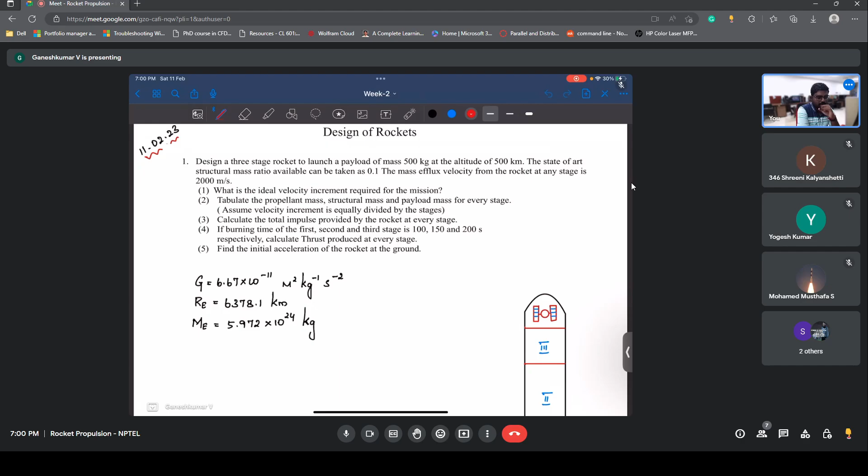I hope I'm audible. Can someone confirm it? Yes, sir. Okay, thank you, Digant.

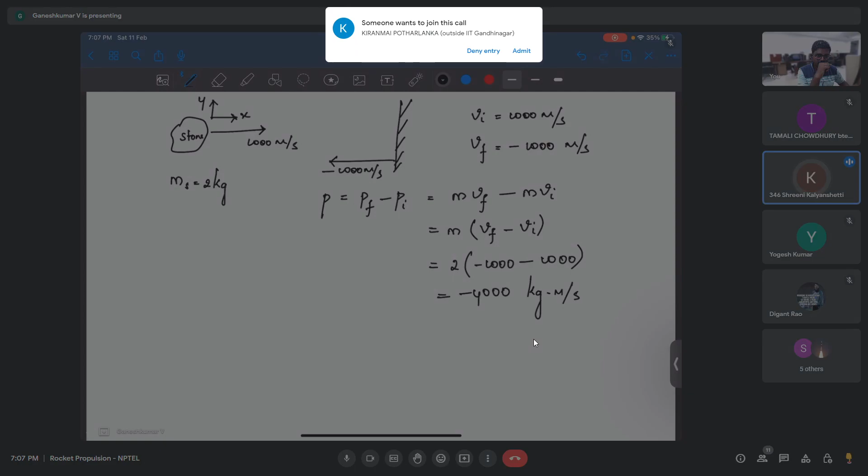Sir, I had a question. Due to my college exams, I couldn't complete assignment one and two. Will it affect the program as such? It depends, if you are appearing for the exam, you are supposed to get certain marks to be considered a pass, so in that way it affects you, but not that much. So how much do you need to get a pass mark?

So, there's some certification criteria, right? Based on that only, you will be graded. If you leave one or two assignments, I don't think it means you won't be able to attend the exam or get the certificate. It just means it affects your grade, that's all. Other than that, nothing's going to happen.

I'll complete it in this week, just wanted to confirm. No problem, it's just your grade might get affected. If there are 12 assignments and you're able to complete 10 fully, I think it will be some 80%. And if you're able to get good marks in exam, you can easily cross 80%, or maybe 70%.

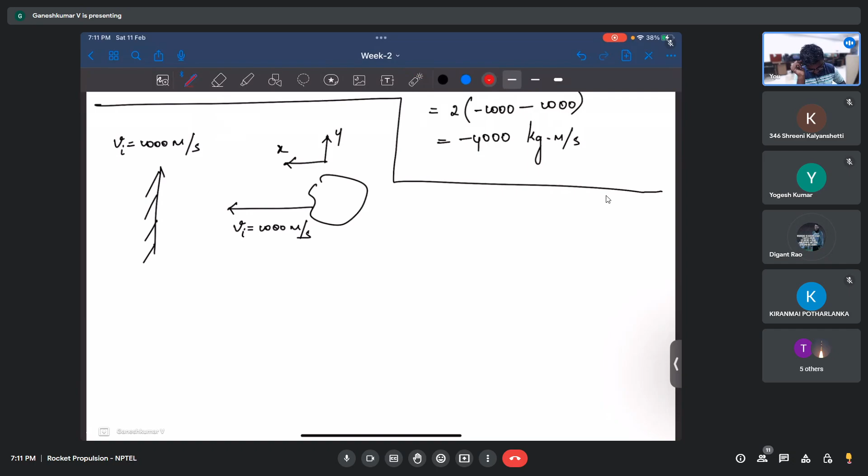If you solve for this, it is again going to be m into vf minus vi, which is 2 into minus 1000 minus 1000, again giving minus 4000. It doesn't matter which frame of reference you take, it's based on what is your initial velocity of the stone. If the initial velocity is positive and the final velocity is negative, you should always find momentum from final minus initial. Whenever you do it, for whichever frame of reference you take, your change in momentum is going to be negative.

Okay sir, thank you sir. Is that clear? Yes, sir. Okay.

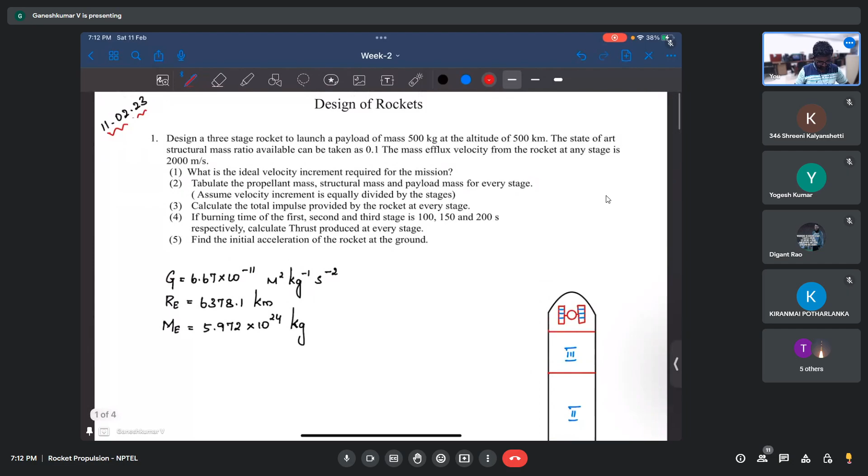One second, I think I got disconnected.

If we have no more questions, I will start with today's question. Today we are going to solve only one problem, not so many problems. But with this one problem, you should be able to solve all your week 3 assignment problems. This is also going to be interesting, I'm going to show a nice fact after you perform this exercise. I named it design of rockets, just to cover it, just for fun.

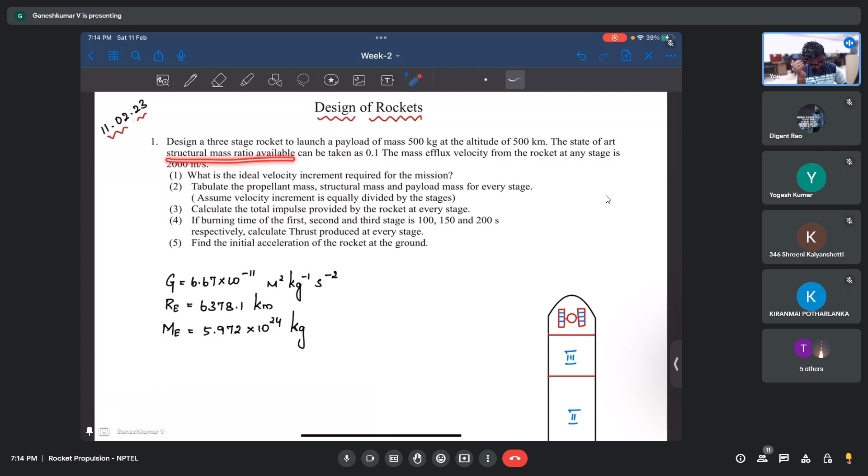What we will do today is solve this one problem: we will try to design a three-stage rocket motor, a three-stage rocket. Using this three-stage rocket, we will launch a payload, which can be anything like a satellite, of mass 500 kg at an altitude of 500 kilometers. So we need to launch a satellite of 500 kg and station it at 500 kilometer altitude above Earth's surface. The state-of-the-art structural mass ratio available can be taken as 0.1. What is structural mass ratio? Can anyone guess?

It's fine. You can give any answer.

There is something called structural mass ratio. Structural mass ratio can be defined as structural mass divided by total mass of the rocket. So what is the convention we follow for that? Is it alpha or beta? I think it's just beta, sir.

Okay, is this fine? Can I write like this? We can take ms to be mass of structure and m-naught to be initial mass of the rocket or at stage. Okay, yes. So this we are going to take as point one.

So this is something that comes from design perspective. This is something we can't have control over as a propulsion engineer, it's an aspect of the structural engineer, how well he can design a rocket with a very less structural mass ratio. Do we need less structural mass ratio or more? What do you think?

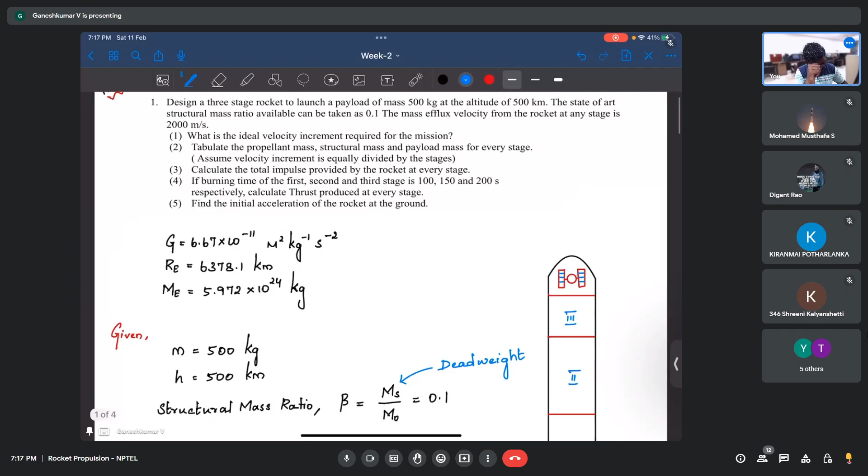So as a design engineer, what people will try to do is reduce this dead weight as low as possible in a rocket, because if the total mass is 100 tons and the structural weight is 10 tons, if you can reduce the 10 tons to 5 tons, then you can raise that 5 tons as payload mass instead. So with the same rocket, you can send a higher payload. That is the reason they will try to reduce it, or it comes from the design aspect.

For now, let's take a state-of-art structural mass ratio to be 0.1 - that's what it presently is. In fact, for a solid propellant rocket motor, it's going to be around 0.08, and for a liquid propellant rocket motor around 0.05. Some very well designed rocket motors even get to 0.03. So there are different ways, it directly comes from the design aspect.

So let's not worry more about this, we'll just assume it to be 0.1 for every stage - if we have three stages, it's going to be 0.1 for every stage. And then what else we have is the mass efflux velocity from the rocket at any stage is given to be 2000 meters per second, which is nothing but velocity of jet.

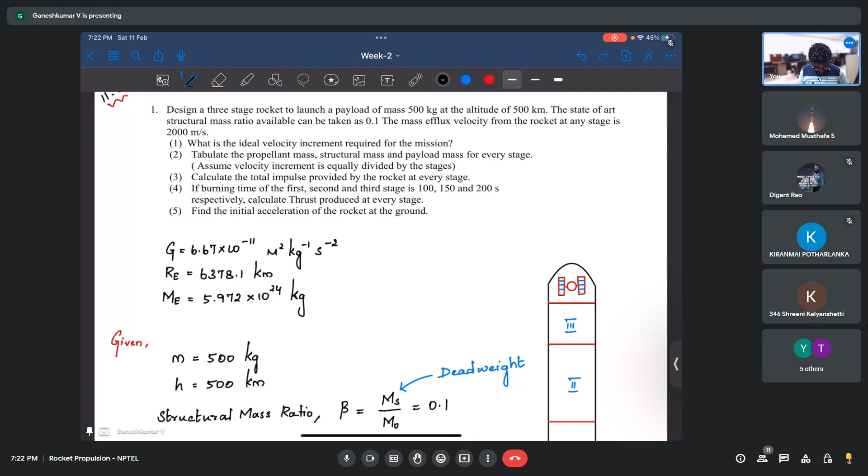Is this clear till now, what I am trying to convey? Yes sir. So how do we calculate delta V? Or let's say, what is the total velocity increment you need? How do I calculate it?

So you understand the fact that we need velocity increment, right? Because the satellite, at ground, has zero velocity. So if I want to put it in the orbit, it cannot be at rest in the orbit, right? It should have some velocity so that it goes round and round in the orbit. What should be the velocity? That is what we need to find out.

So do you know any formulas that we derived previously to find this out? Maybe the concepts behind deriving those formulas.

So Vj multiplication of ln of mi divided by mf. Okay, the delta V is equal to Vj ln of mi by mf, right? Yes sir.

Okay, but this is the delta V given by the rocket. I'm not asking about that delta V. I don't know the mi, I don't know the mf - I didn't give anything about the rocket. Mi yes, and mf you are going to find out, right? How is this going to help you in finding the delta V?

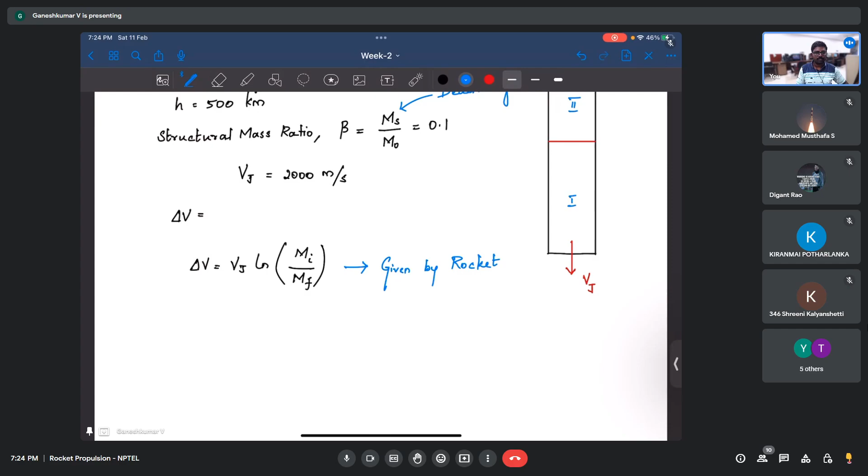So if I know the rocket, I can find the delta V given by that rocket. But I'm going to design the rocket - for that, I need to know what is the delta V required, so that I will design a rocket such that it gives me that delta V. So basically, I'm telling that I want to put this mass at 500 kilometer altitude. What should be my delta V?

So let me write it down - maybe you can recall it. Delta V is actually G times ME by RE times, RE plus 2h divided by re plus h. Can you guys remember this formula?

So you may be referring to it as VT, is it? Yes sir, VT. So total velocity, what does VT mean? The total velocity increment, right? Yes sir, VT.

So what this actually tells us is, where this concept comes from, is this required for the mission. There are two things: this is required for the mission in order to put a payload on the orbit. So what is the delta V I need for that payload? That is what this formula tells us. And as soon as you know the total velocity increment you need, you can design your rocket such that it gives you that increment to the payload.

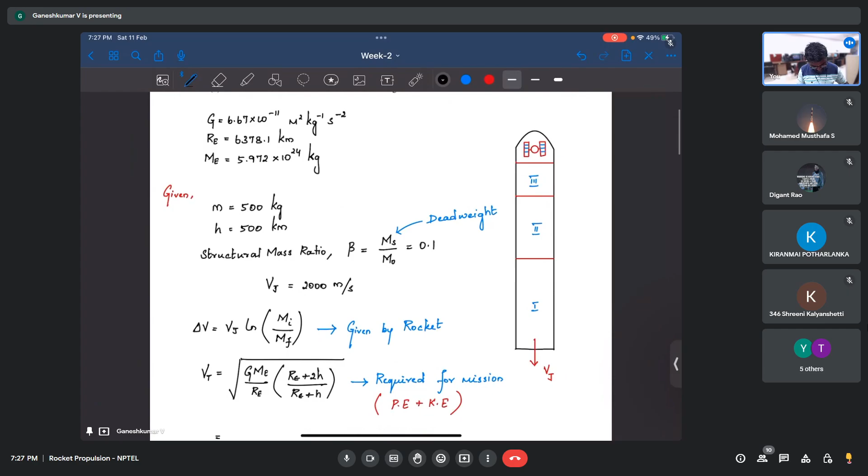So do you have any doubts? What is the implication of these two formulas? Both tell us about delta V. So here VT is nothing but total velocity increment, which is also a delta V.

Is this fine? Yes sir, did I confuse? It's fine, right?

So if this is fine, maybe you can substitute the values, and you can let me know what is the delta V required for this mission. So I just want to connect whatever you learned in the previous week to this week, how these two equations are related to each other. That's why I made this small exercise before starting the calculations of staging in rockets.

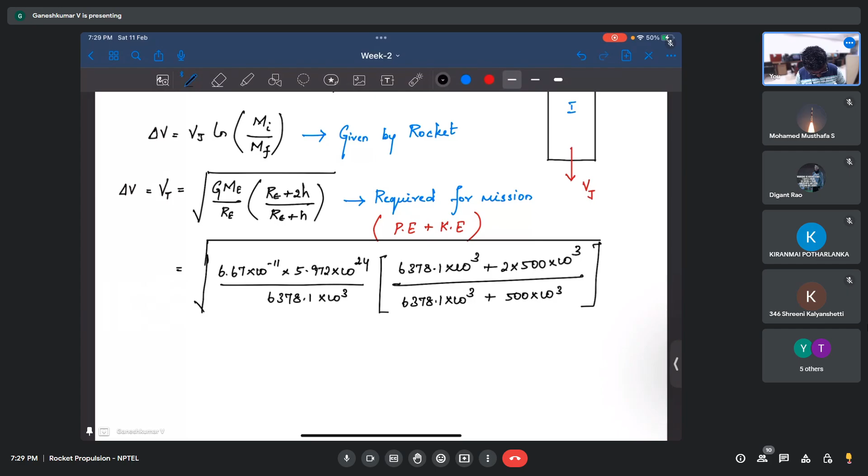So it should be placed at 500 kilometers, right? Then what should be the total velocity increment I need? Could anyone please tell? Are you guys calculating or?

I hope you can understand. So we have 10 people here, including...

Sir, 8.18 kilometers per second. I think so. So it is 8.18 kilometers per second. All right. So in order to put a satellite of 500 kg at an orbit of 500 kilometer altitude, you need a delta V increment of 8.18 kilometers per second.

Now this delta V increment should be given by the rocket, and that rocket should be able to produce enough thrust to give me this delta V increment. So in order to have this much thrust, we are going to divide this rocket into three stages, and we are going to perform calculations to determine what is the mass of these stages, how much mass of propellant you need to achieve this delta V. That's what we're going to see going forward.

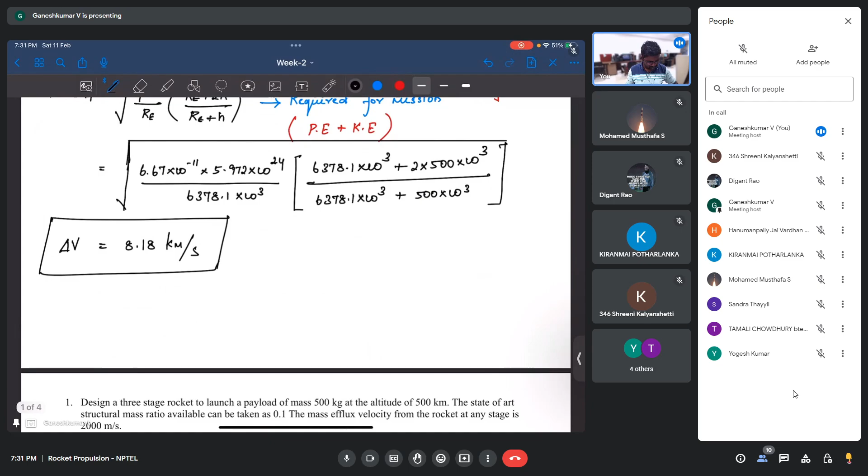So the next question is, if anyone has any more doubts, please ask me now. You can stop me anytime and ask me, okay. So what we know till now is delta V to be 8.18 kilometers per second. So this is done.

Now what we need to do is we were asked to tabulate propellant mass, structural mass and payload mass for every stage. And what I know is mass of payload is 500 kg, which is at the top of the third stage, right? It is not at the first stage. And what else I know is that beta is 0.1, which is for all the stages.

Let's say beta 1 is also 0.1, beta 2 is also 0.1, and beta 3 is also 0.1, okay, which is nothing but mass of structure by mass of stage i, whichever stage it is. i varies from 1 onwards.

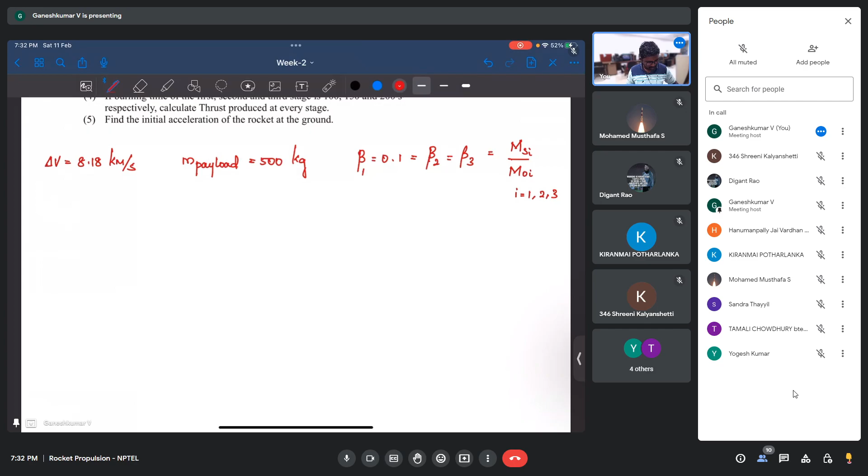Now how do we go forward? We start our calculations. Can anyone give me a hint or something? And we also have Vj to be 2000 meters per second.

So in order to do this, we need to use this equation, right? Mi by Mf. Okay, what we know is we know delta V, we know Vj, but we don't know Mi and Mf, right? And one more thing is this is for a single stage, right? So what about multi stages?

We have three stages, right? For multi-stage rockets, how do you perform this calculation? So we need to add each and every stage of delta V, sir. Wonderful. So the total delta V total is going to be delta V1 plus delta V2 plus delta V3.

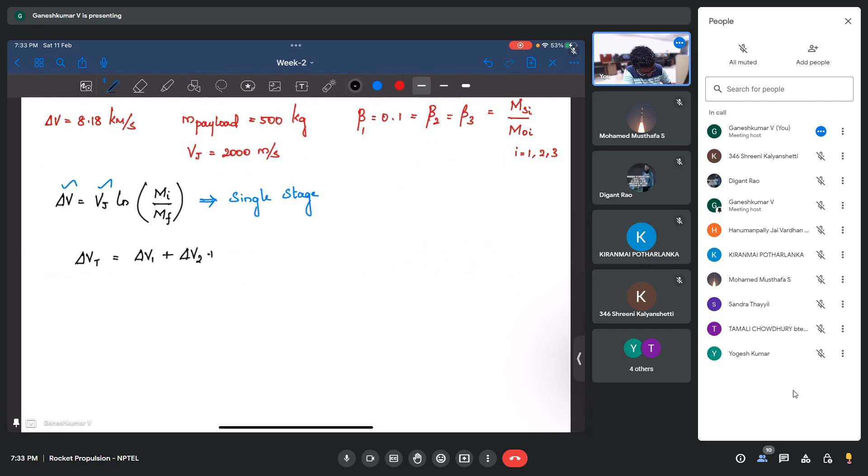So for each and every stage we are going to have Vj, and we are going to assume Vj to be constant, which means the propellant is going to be same, and we are going to assume Vj to be constant. If you do that, what happens?

First stage ln of mi by mf, second stage mi by mf, third stage mi by mf, right? But still, yeah, this is fine. Delta Vt, this is going to be for three stage rocket.

Okay, so we are asked to assume velocity increment is equally divided by the stage, which means that... we'll come to that later, no problem.

Now here, this total velocity increment we know, Vj we know, right? But still this equation doesn't help us. We don't know Mi and Mf, right, of each and every stage. How do we go forward with this? Can anyone guess what could be the way to find all the masses?

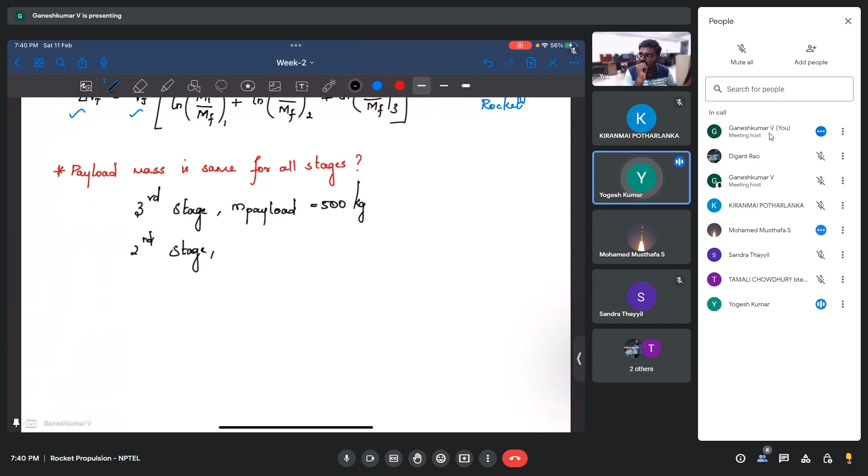It will be 500 only, sir, because it is not going to change its weight. Only after the first stage has burnt, it will be released into the orbit. So the total weight of the rocket is going to be less, but the payload weight is not going to be less, because it is going to be ejected into the orbit in the last stage only. Still, in the last stage, the payload has the same weight. So you need to note that payload mass is 500 kg - that is true, but the final mass of each and every stage is going to be different.

Right, so okay, I agree with you - payload mass is going to be the same. Let me put it in this way: payload mass in the sense is just the payload. Okay, so let me ask another question.

What is my MF at all at each and every stage?

So we can do one thing. MF of first stage will be MF. Then second stage is MF. We can take the total mass, final mass, as MF. Then for second stage we take MF minus M1, which is the mass of the first stage. Then for third stage we take MF minus M1 minus M2, which is the mass of first stage and second stage.

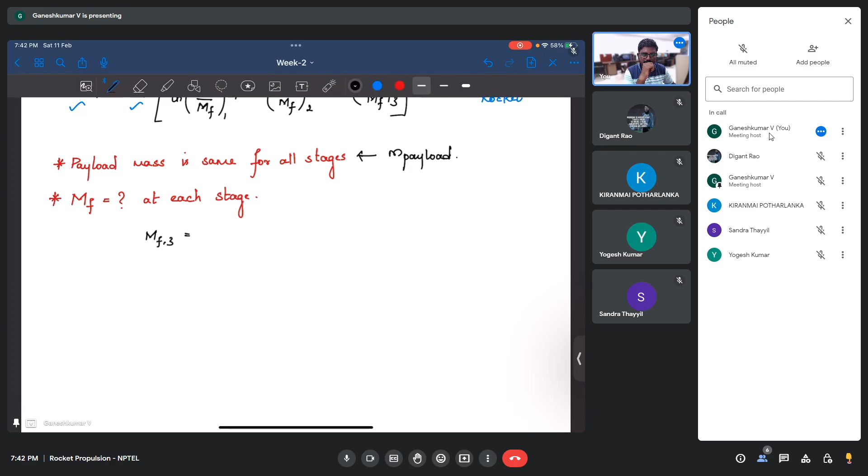So total mass of the rocket, that is Mi, minus initial mass of the rocket, Mi minus MF2, minus MF1, minus m of...

This is also right, but you are thinking in a very complicated way. It's so simple. At the third stage, what I'm going to have is the propellant is going to be depleted, and I'm going to get separated from the third stage, and what else is remaining is just payload, right?

It's just 500 kg, right? Yes sir. Okay, so whatever you said is also right, but it is a little bit different.

So let's say what is Mi? Mi is going to be m of 1 plus m of 2 plus m of payload, right? And then we have minus m of 2 and minus m of 1. Whatever you said is right. These are all going to get cancelled, and finally m of payload is going to be there, right?

So whatever you said is also right, but you can think in very simpler terms also. The third stage final mass is going to be 500 kgs.

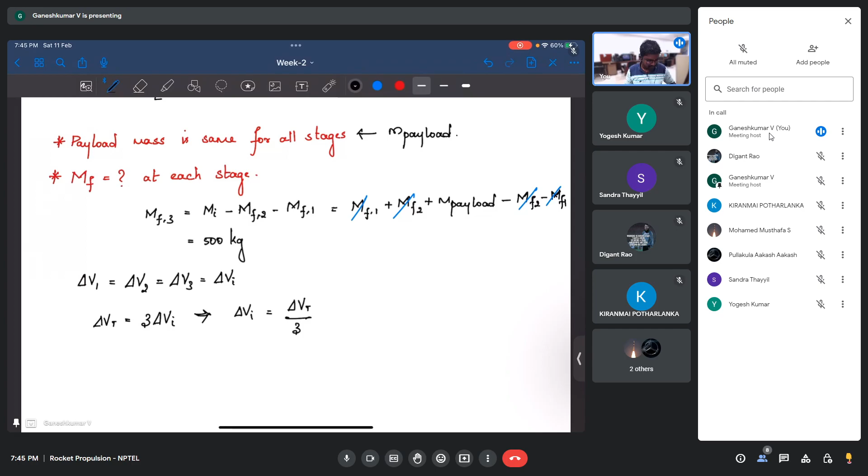Then what happens to the equation? Delta Vt is going to be 3 times delta V, right? So each stage is going to give me the same delta V. That is what this statement is telling us. So what we can get is, we know that delta V of any stage, let's say I, it's nothing but delta Vt divided by 3, because we have 3 stages, okay.

So why do we need to know this? Because what we know is delta V of, let's say, third stage, it's nothing but Vj ln of Mi of third stage divided by Mf of third stage, right? Here we know Mf of third stage, we know Vj, and if we know delta V3, we can find the initial mass of third stage, right? And then one by one we can go forward for the subsequent stages. That is the reason we start from where we know, okay.

So can anyone tell what is delta Vi, which is nothing but 8.18 divided by 3, right? How much is that? 2.72, sir. Okay, 2.72 kilometers per second, right? Yes sir. Okay, very good.

So then can anyone tell me what is Mi3, which is nothing but exponential of delta V3 by Vj, times mf3, which is nothing but payload. So how much is this Mi3, initial mass of the third stage? Can someone quickly calculate?

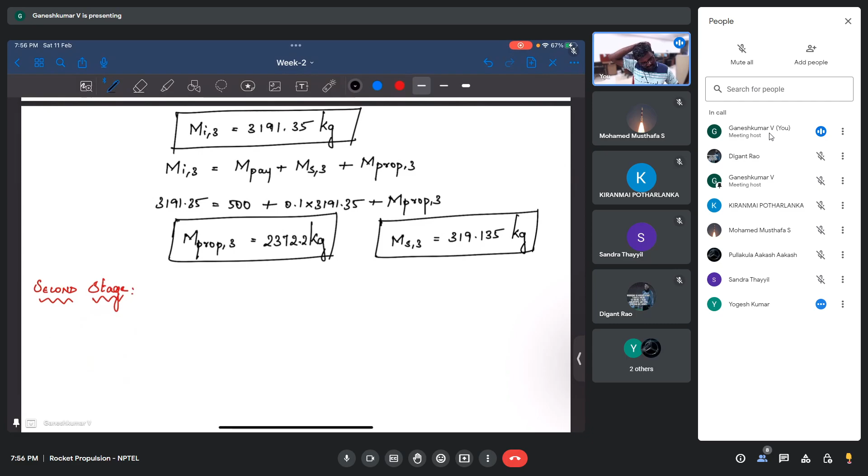And what we also know is mi at 3, which is also 3191 kgs. And let's, for the sake of completion, we will write ms at 3 also, which is going to be 319.135. So these are the values. Sir, can you show me the calculations of MF3 one time?

So is this one? Yes, sir. So you understood, or can you repeat it one time? Yeah. So at the end of final stage, all the propellant is burnt out, right? But structure remains there. Structure and the payload are going to be there at the third stage. What we know is, in that final mass, we know only payload.

Since we know payload in that final mass, we start our calculation from there. For other stages, we don't know anything about structure or payload, or the initial mass. So that's why we start from here, and we know that at the end of final stage, if you look at this rocket, we have this satellite which is 500 kg, and we also have this structure around it, which is also zero point 0.1 times initial mass of 3.

So this whole thing, okay, this is payload, and this is the third stage, and at the end of third stage, the propellant here will get depleted, but this structure is going to be there with the payload, which is satellite. So this is going to be 500 kgs, and this is going to be zero point 0.1 times r, nothing but beta times mi of 3. So that's why we wrote the final is going to be 500 kg plus structure, which is ms of 3, which is nothing but beta times mi of 3. Is that clear, Yogesh?

Yes, sir, now it's clear. So there's going to be structure also at the end of every stage, so that's what you need to take into account. That's the takeaway here.

So now, coming to the second stage, again what we need to know is mf at second stage and mi at second stage, right? Then maybe if we write, let's say delta v2 is going to be vj times ln of mi of 2 divided by m of 2. The equation can give us mi of 2, but what we need to know for this is m of 2. So what should be the m of 2?

So at the end of, again let's think logically, at the end of second stage, what is left after all the propellant is gone? What is left? At the end of second stage, this whole propellant is gone, right? We have this full third stage is going to be there, and we are going to have this satellite, which is payload. But you should understand, for the second stage, this whole thing is a payload, because third stage is not ignited. It just stays there as a mass, and in addition we have a satellite.

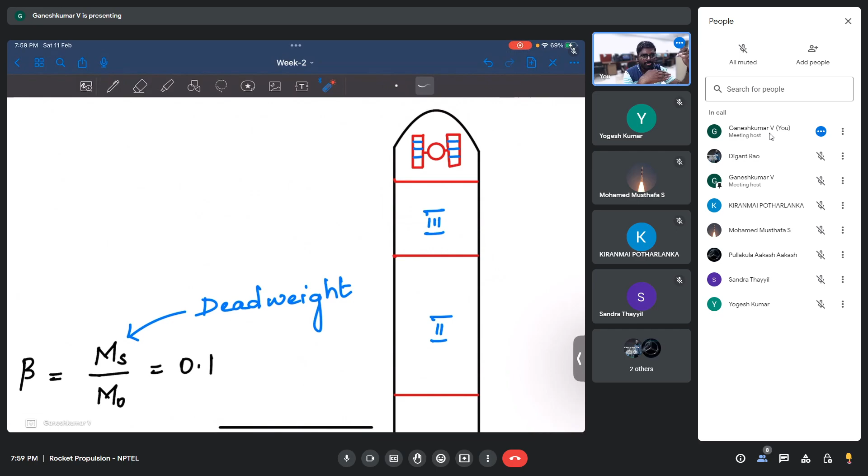So these both are considered to be one single payload for the second stage. So for the second stage, third stage and satellite is called as payload. So if that is the case, what we are going to have here is mass of satellite plus mass of third stage, but we can write these two together as mass of third stage, or maybe mi of 3.

And in addition, what we'll have, we will have structure of second stage. Is this right? Do you guys agree? Yes, sir, right, yes sir. Okay, so for the third stage, third stage is just being idle till the second stage has been completed. So that's why it is also considered as a mass, as a payload, or a useful mass for the second stage. And we also have a dead weight or structural mass at the second stage, at the end of everything.

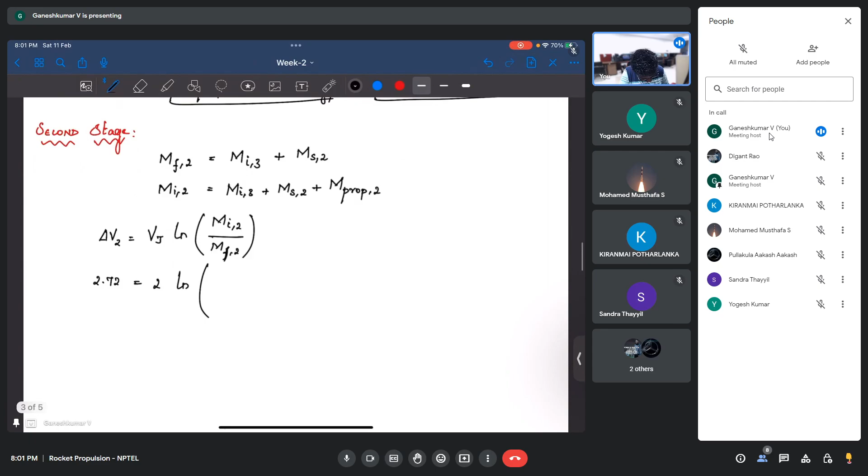Now this would be mi of 3 plus ms of 2 plus mass of propellant at second stage, right? This would be mi of 2. But anyway, we will calculate mi from here. So what would be delta v? Again, we have 2.72 and then ln of mi of 2, which we will keep it like this, divided by m of 2, which is nothing but mi of 3 plus ms of 2. What we know about ms of 2 is going to be 0.1 times mi of 2, isn't it? Because we assume that structural mass ratio is going to be 0.1 everywhere.

Now if we try to solve this, what will happen? We will have mi of 2 equal to exponential of 2.72 divided by 2 times mi of 3 plus 0.1 times mi of 2, right? What we know is this thing, and we know mi of 3, which we recently found, which is 3191.35 plus 0.1 times mi of 2. We'll keep it like that. This side is also mi of 2. So if we try to solve, how much you are getting for mi of 2? This turns out to be 3.896.

This turns out to be 3.896. How much are you getting? Getting 20,890. Is that right? Come on, do you guys have a calculator with you? It should be easy, right? Yes, sir, correct. Same mass we are getting. Yes, sir, same. Thank you.

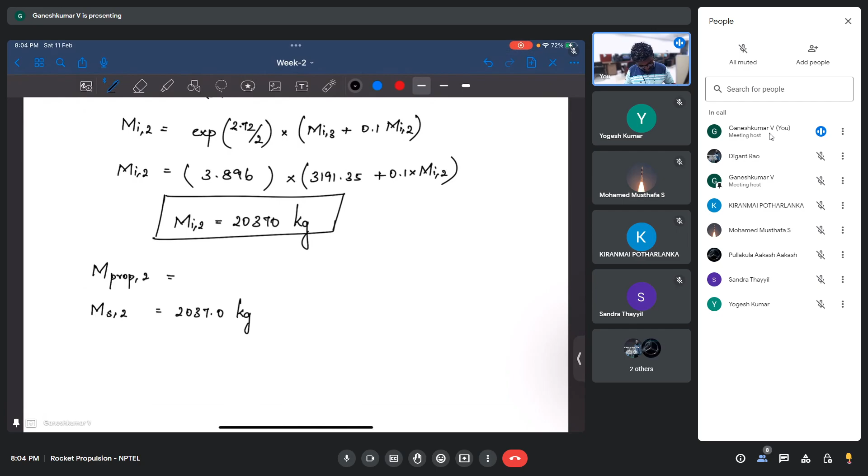So similarly, can you guys tell me what is the propellant and structural mass? Structural mass is going to be easy, right? It's just multiply by 0.1, which is going to be 2087.0 kgs. And how about propellant mass? There is one more thing also you can do. So what you can do is just subtract the structural mass and the initial mass of the third stage from this mi of 2 in order to get propellant, right? Yeah, anyway we are going to do that.

Could you explain the mass of propellant for stage 2? Okay, so it comes from this equation. We have mi of 2 to be so the total mass at stage 2 is going to be the mass above it, which is stage three's total mass, plus the structural mass of stage 2, plus the propellant mass of stage 2, right? So what we found from here is mi of stage 2. So we can write this as mi of 3 plus ms of 2 plus m propellant of 2, right?

We know ms of 2 to be 0.1 times mi of 2. We know mi of 2 to be 20,890. So this is known, right? This is known, and mi of 3 also known, which we calculated before. And mi of 2 also we know. So we can calculate m propellant. Is that clear? Yes, sir, understood.

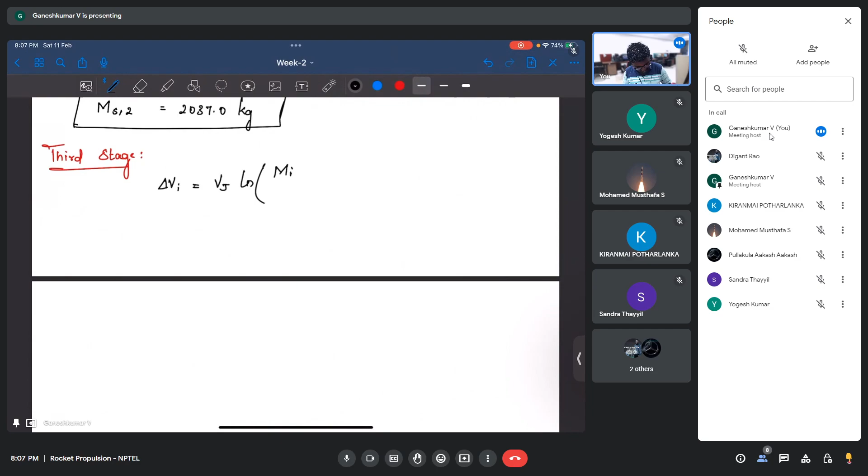That's all right. So let's go to the third stage. Third stage, what we will do, we will do the same thing. We can do the same thing. Vj ln of mi of 1 divided by, it's not third stage, right? It's first stage, because we started from third stage, now we came to first stage. It's going to be mf of 1, right?

So there is also one more equation with which you can solve, based on these fractions, right? Maybe for the first stage you try with fractions, or you can try with this equation also, not a problem. What we know is alpha plus beta plus gamma, right?

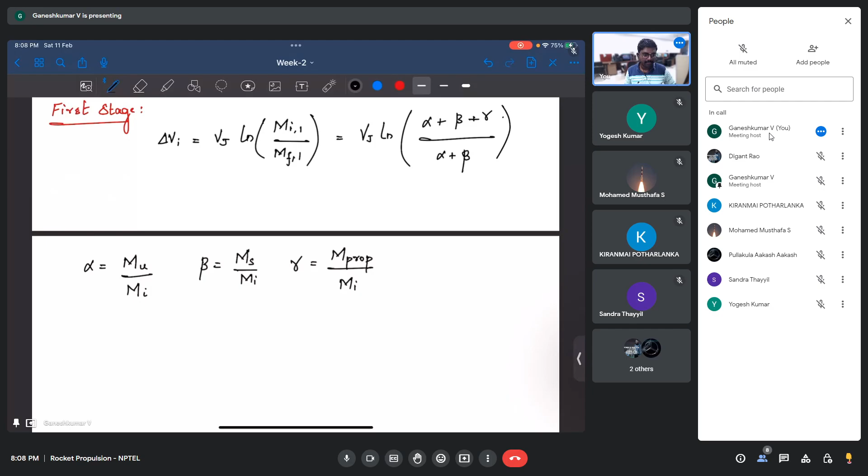Do you guys know what is alpha, beta and gamma? Alpha is nothing but mass of payload or useful mass, divided by total mass, mi, right? Similarly, beta we already know, ms by mi, right? And gamma, which we know is m propellant by mi, right? What we also know is alpha plus beta plus gamma is equal to 1, right? So your equation actually simplifies to ln of 1 by alpha plus beta. For any stage, it's going to be alpha i beta i.

The reason to use this equation is we know beta I. So you can easily find alpha I for any stage, and once you get alpha I, you put in these equations and you can get it easily. So you can either use this equation or these equations, it's up to you. Maybe we'll stick with whatever we started. You can try with this equation also.

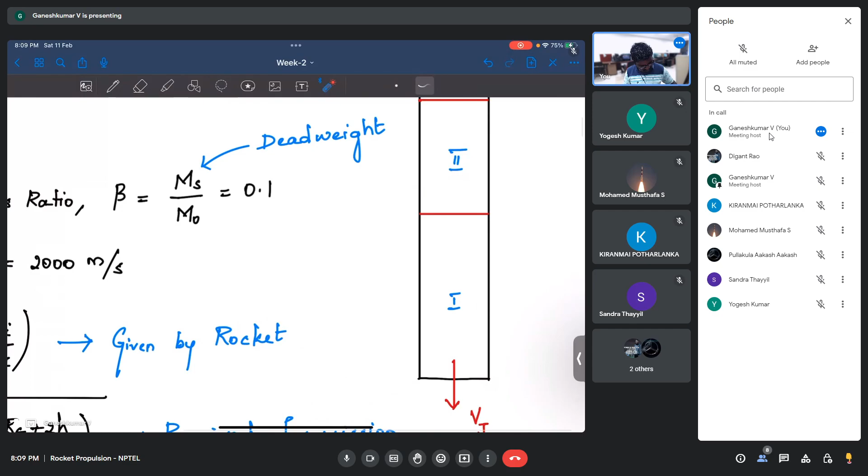So mass of final at first stage is going to be mass of... can you guys tell? So at the end of first stage, this is what we are going to have: the total mass at the second stage, and then we are going to have this structural mass.

Okay, let me write it here. Second stage, which is the total mass above it, plus first stage. And what we know is mi of second stage, and then ms of first stage is going to be mi of first stage, zero point 0.1 times mi of first stage. Let's substitute in our equation, which is going to be vj times ln of mi1 divided by mf1.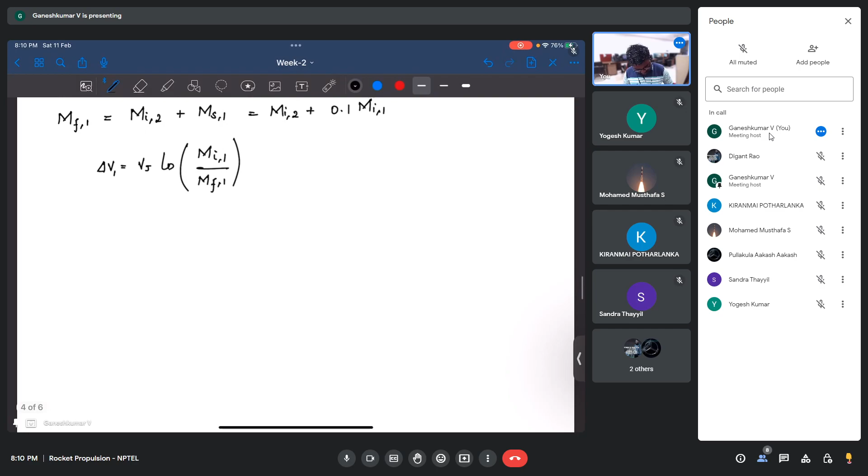Similarly you need to perform the calculations. Can anyone tell, mi of 1 is going to be exponential of delta v1 divided by vj times mi of 2, which is zero point 0.1 times mi of 1.

How much? Sorry, I didn't get it. Is that Digant? Is going to be... how much is it going to be? This is going to remain same, 3.896.

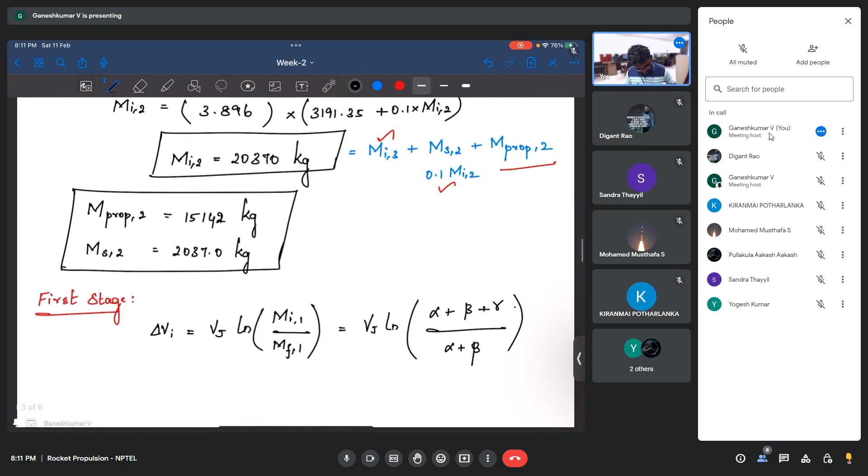How much is it? 3.896 times mi of 2. What we found was 20370 kg, so around 20 tons, plus zero point 0.1 times mi of 1. How much are you getting mi of 1?

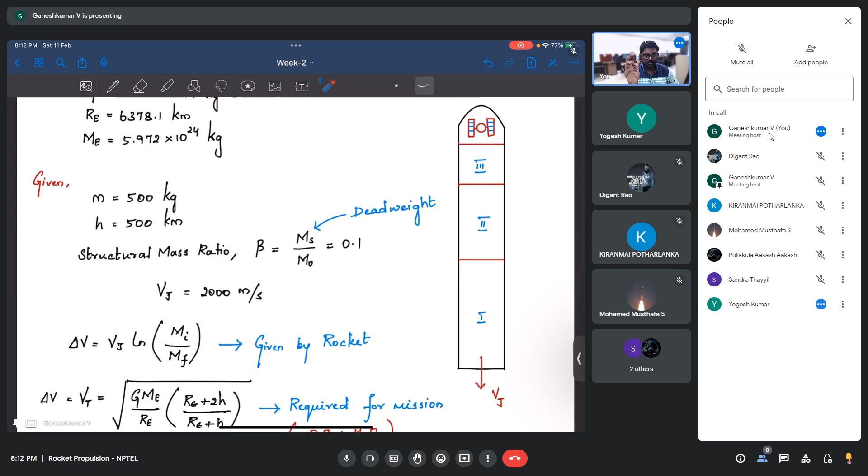Okay, I understand, come again? So MI2 includes both the mass of second stage and third stage. True, yeah, so this mi of 2 is not only the second stage, it's actually total stage, it also includes the payload. So for second stage, the payload is third stage plus satellite. Okay sir, I understand. So mi of 2 includes everything, that's why we use just mi of 2.

All right, so what results are you getting, mi of 1? Maybe if I calculate, 896, 20370... Sir, 130015.5. Okay, 130015.5 kgs, it's around 130 tons then.

Okay, that is fine. Then how about structural mass? Structural mass is going to be one order less, 13001.5 kgs, just multiply by zero point 0.1 with the mi of 1, you are going to get structural mass. And what is the propellant mass? Propellant mass, you can just add structural mass with the initial mass of second stage, which is 20370, and then subtract it with the initial mass of first stage, 130015.5. How much are you getting? Getting some 96644 kgs. Is this right?

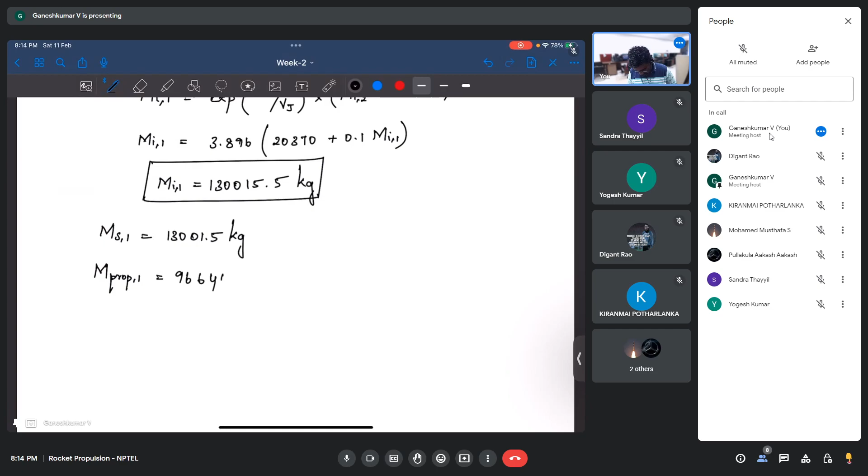Maybe we can tabulate it. Let me write it like useful, which is structure and propellant, and we have total mass. Let's just quickly fill it because it gives you an overall view on how my rocket is going to be.

So by the way, are you guys getting the answers what I get for first stage? Okay, I take it as a yes. If we try to fill it, what is the first stage, maybe we'll try from last stage. What is the useful mass, which is payload mass, which is going to be 500, and then structure mass is I believe around some 319.1, right? Can you guys quickly tell what is this?

And propellant, how much is propellant? So propellant is 2372.2 kg. Okay, 2372.2 kg. How about for this? And so total would be 3191.1, okay.

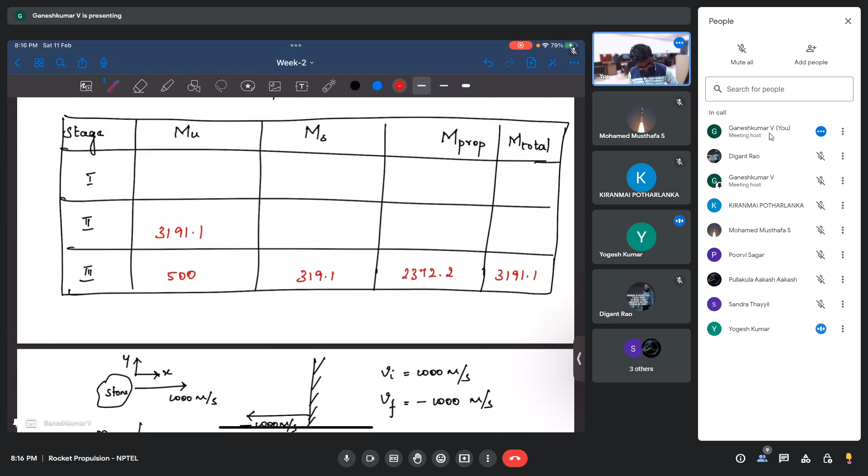For this it's going to be 3191, because for second stage the useful mass is third stage total, which includes satellite plus propellant plus structure of the third stage. And how about the structure of second stage? Structure of second stage, 2037. And then propellant, 15142 kg. For this is going to be 20370 kgs, and the structure is going to be 13001.5, and propellant is going to be 96644 kg, and then total is going to be 130015.5 kg. So one thing we need to understand from this calculation is what is the total mass of the rocket we have at the takeoff.

What is the rocket total mass at takeoff? Yes sir, 1 lakh, it's going to be tons. 130,015.5 tons or kgs, okay, which is almost equal to 130 tons. So in order to put a 500 kg payload at 500 kilometer altitude, we have a rocket of 130 tons.

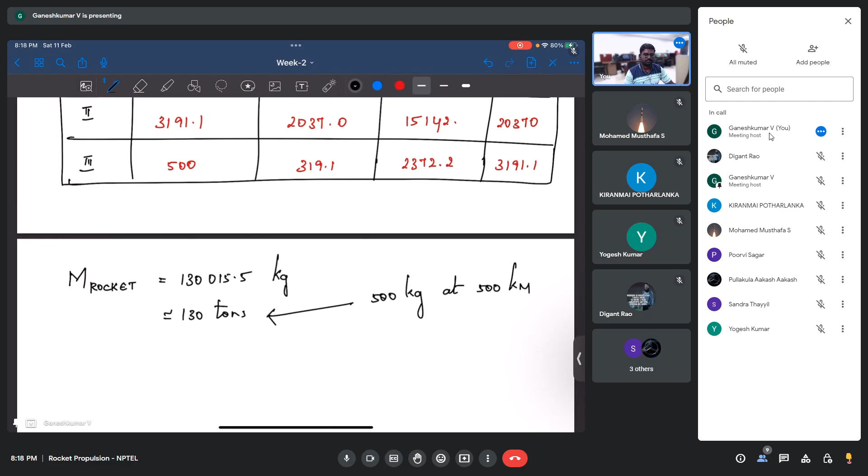Okay, and how much propellant are we going to have? We are going to have 96,644 plus 15,142 plus 2,372.2. So the mass of propellant we are going to use is going to be around 114,158 kgs, which is around 114 tons.

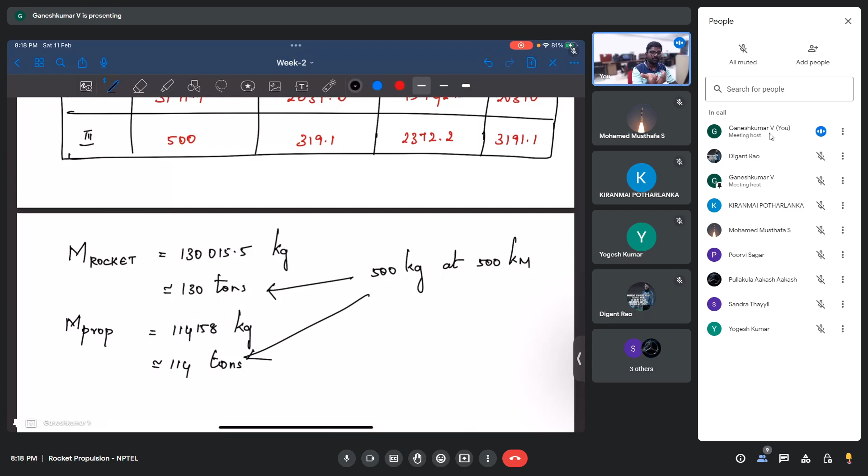So in order to put a 500 kg payload at 500 kilometer altitude, we have to use this much amount of propellant, and the rocket should weigh 130 tons. So there is a fun fact in this.

Whatever you calculated till now is actually for a real rocket. Do you guys know what rocket weighs around 130 tons? It is GSLV. GSLV is the heaviest rocket. Actually, it is PSLV, right?

It is also a little bit heavy. SLV sir, not considering the XL variant sir. So is it SLV? Actually, you are close. It's the new variant, SSLV. I think day before yesterday sir they launched it, right? Yes, yes sir.

Yes sir, so if you go and look at it, it is around 120 tons. It puts a 500 kg satellite at 500 km altitude. That is the maximum it can put, and it weighs around 120 tons. So whatever you designed till now is actually SSLV, which is being used, the recent version of the rocket.

Of course, we consider a few assumptions like beta to be 0.1 and delta V equally distributed between the stages. What you can do is go to the ISRO website, where you can get data on peak thrust each stage can produce and the burnout time of each stage. With this you can find the delta V used by each stage, and also calculate all the propellant masses, structure masses, and payload mass for each stage, because that is also going to be a three stage rocket.

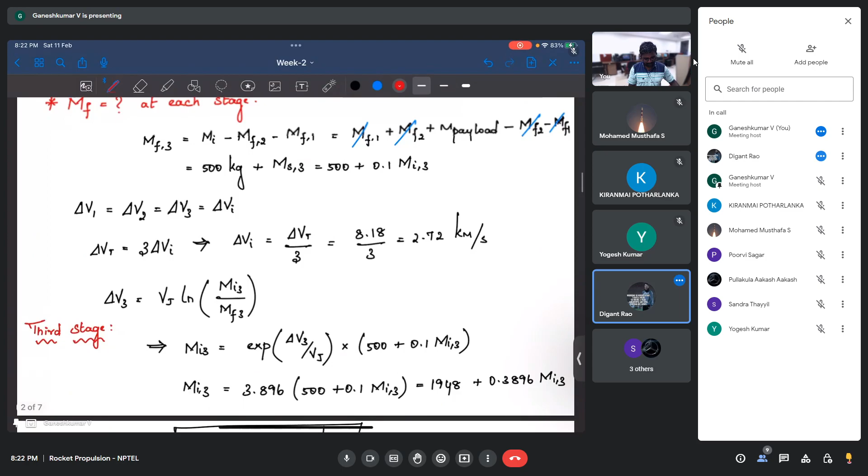And in fact, if you go and see, it's a solid propellant rocket. It uses a fuel called HTPB propellant, which you will learn eventually. It's also going to have the velocity around 2000 meters per second only. So that's why I gave this specific example, for you to understand a few real-time situations of what is happening.

Okay, so do you have any questions? Yes. Yes sir, I have a question about assignment 3.

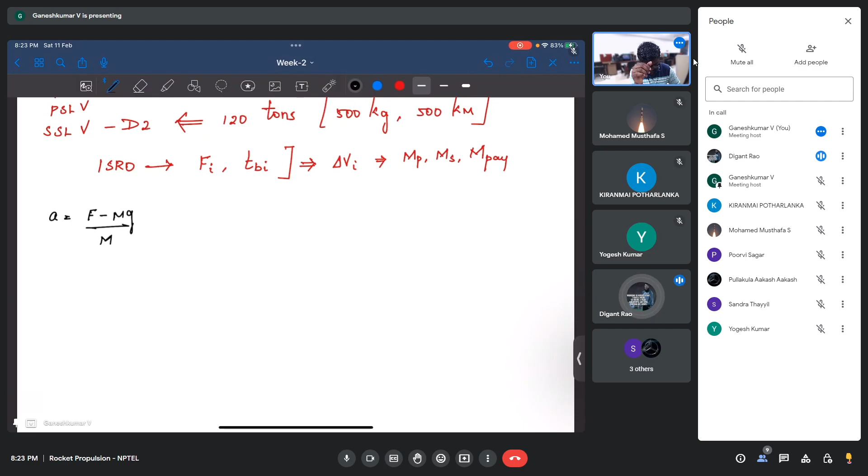Sir, there's a formula discussed in the lecture. Acceleration is equal to propellant into jet velocity minus initial mass into gravity g, upon initial mass. So this formula we have used for each question: takeoff acceleration of the rocket, or the acceleration of the payload when the firing is stopped.

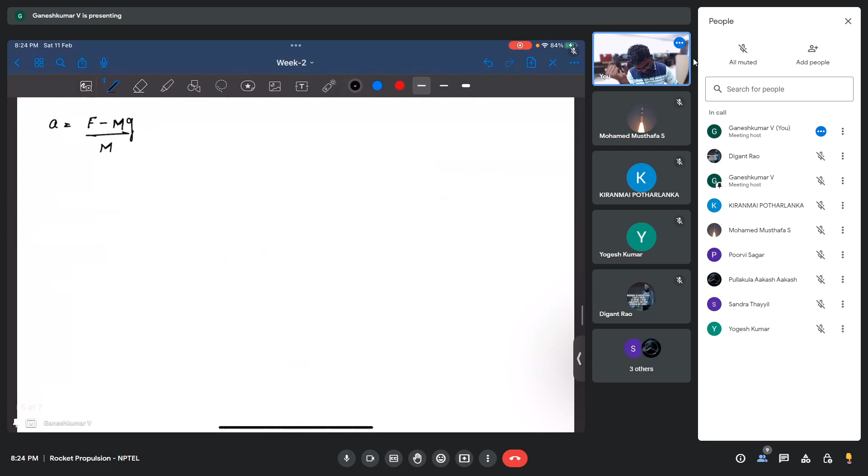Yeah, good question. What I would suggest is, if you go and look at how this formula arrived, you won't need to ask this question. Let me do that also. Anyway, we are going to have this question coming up in the fifth one, but I will go a little ahead. Okay, so yes.

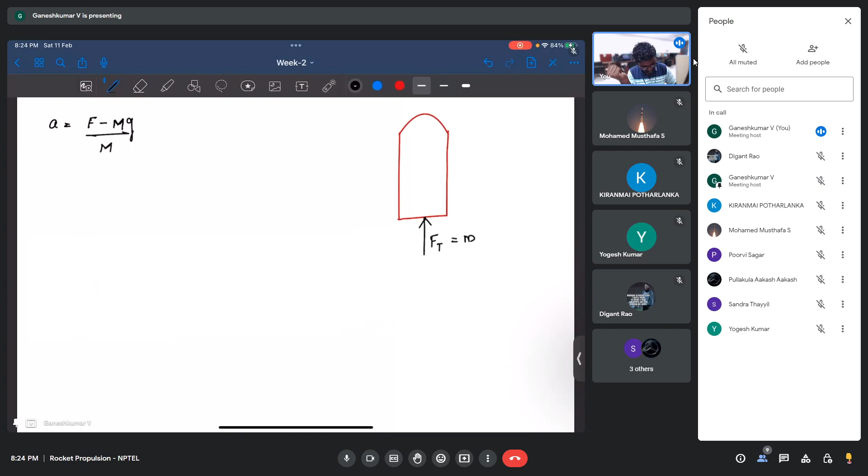So here you have the mass of the rocket. Let's say this is the rocket, and what you are going to have is thrust here, right? The thrust, which is nothing but m dot into v jet, vj, right? And what we have is the mass times gravity here, which is mass of the rocket times gravity, right? And then you apply Newton's second law.

That's all. So there's no need to follow a formula. Okay, what is Newton's second law? The summation of all the forces is going to be mass times acceleration. So what are the forces you have? Let's say our x is like this, or let's say y is this direction. The ft is going to be positive and gravity is going to be negative, which is nothing but ma, and this is going to be m dot into vj minus mg, all divided by m.

Now you are asking what would be at the third stage, right? So you do the same calculation for the third stage. At the end of the third stage, or the middle of the third stage, or after separation of payload, before separation of payload, whatever, you do this Newton's second law for the third stage. Basically, since it is in your week 3 assignment, I'm not supposed to do that for you. You have to do it by yourself. I just give you how you can approach this problem. Is that fine?

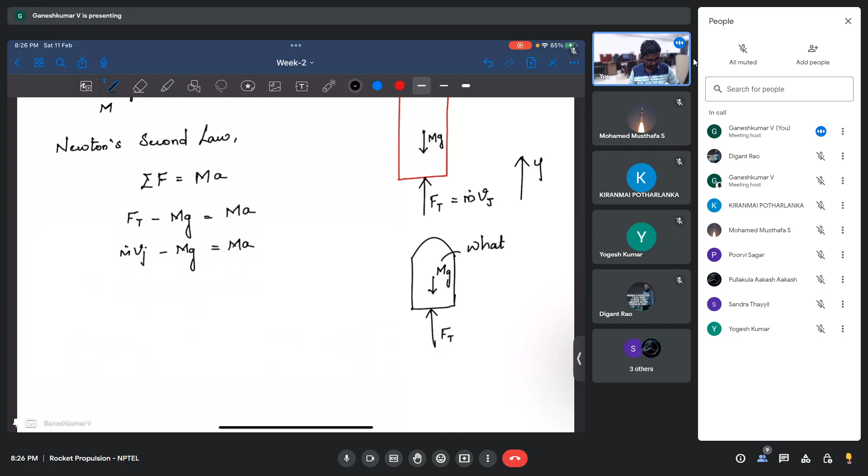Yes sir, yes sir. So you understood how this works, right? The thrust is going to be the same. The mass in this thing is going to be the same. But what should be your mass? That you should carefully find out. That is something you need to be careful about. And thrust, I think most probably, will be same. Please check it out. And this m, if you find it carefully and put it in this formula, or if you just do a Newton's second law, you are going to get the solution. Okay.

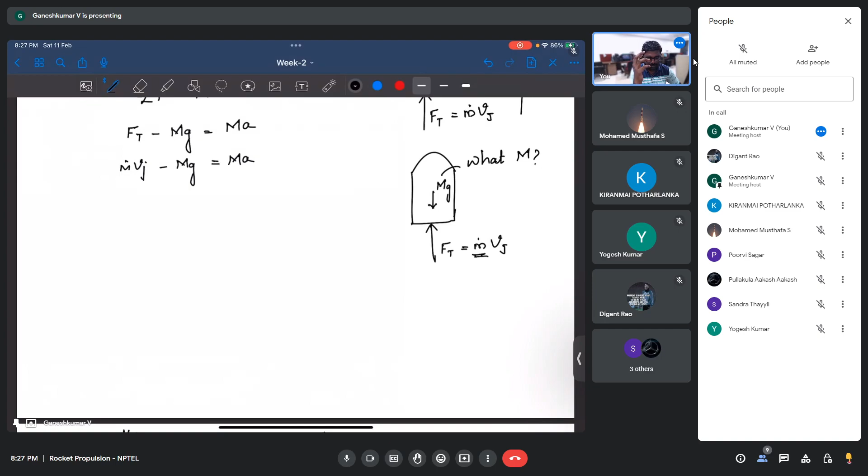Sir, so for the third stage, do we consider the mass of the satellite only, or the structure also? For thrust, there is no mass of satellite or structure involved, right? What it says is m dot. M dot is nothing but the mass flow rate of gases coming out of the rocket. It has nothing to do with the payload. Payload is not coming out, right? Payload is not coming out, structure is not coming out. Propellant is only burning and it produces a lot of gas which comes out of the nozzle. M dot is different and capital M is different.

Sir, how do I find m dot, or are you asking for capital M? Capital M, that you should only find out. What is the thrust? Thrust is m dot into vj. There is no change in m dot into vj. But what is this capital M, you need to find out. I can't tell you the solution for that because it's in the assignment of week 3. Maybe we can discuss it in the next lecture.

Okay, okay sir. What should be my M at the end of the third stage? Should it be just the payload? Should it be payload plus structure? Should it be the total initial mass of the third stage? You need to think carefully and do it. Okay.

So if there are no more questions sir... Yes, can you, Yogesh, explain that m dot part, like how to find the m dot? Okay, so how do we find m dot? I will, yeah, sure.

Maybe what we will do is, I'm going to find the m dot in this problem also. You will get an idea how m dot is found. Is that okay, fine? Yes sir, fine.

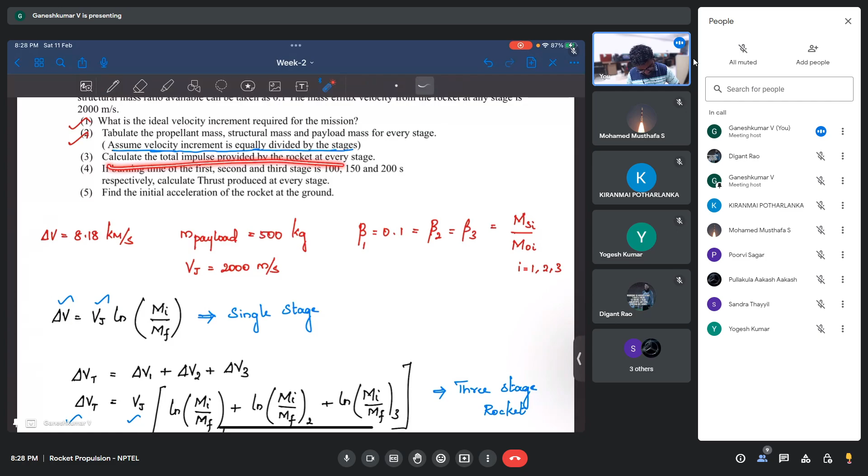So the second part is over, we found all the masses here. Now what we will do is find the total impulse provided by the rocket at every stage. So you know how to find the impulse, let's do that. Total impulse.

What is the formula for impulse? Force into time, right? What else do we know? Can say change in momentum also. Okay, change in momentum, how do I write it? Delta P. You can also write F into delta T, but all these things don't give you any idea of what is the total impulse, right?

What we also know is, can you guys tell me what is specific impulse? Impulse by mass of propellant, right? So the amount of impulse produced per unit mass of propellant is specific impulse, and you need to know that this is the most important design parameter or performance parameter of any rocket. So whenever we develop a new rocket, the first thing they ask is what is the specific impulse, how much impulse am I going to get for burning this much propellant. This is the performance parameter of any propulsion system.

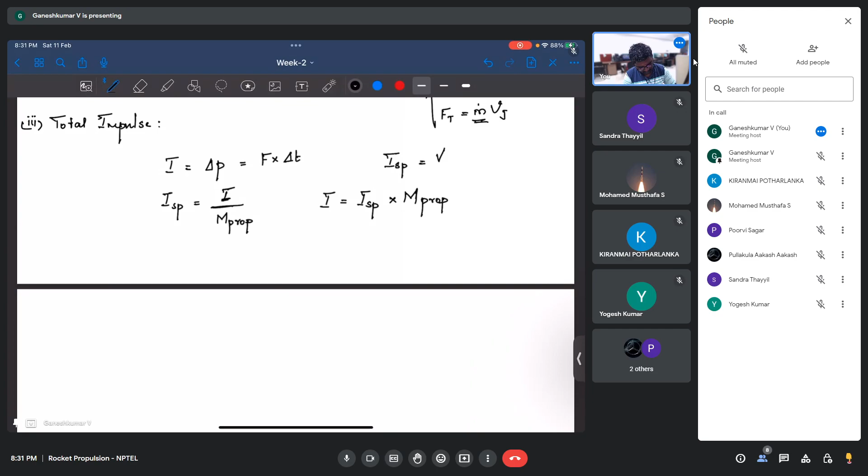Okay, specific impulse. So do we know specific impulse? Can you guess what is specific impulse? If you go back and check, it is nothing but exit velocity or the jet velocity. We know jet velocity, we know the mass of propellant, so we can find the specific impulse for each and every stage. So is this clear?

Do you know how we got specific impulse to be jet velocity? You need to go back to the lectures and check how do we get specific impulse to be jet velocity.

If I want to quickly give you, it's nothing but F into delta T by m propellant, right? F is nothing but m dot into Vj times delta T by m propellant. M dot into delta T is nothing but m propellant, so m propellant times Vj divided by m propellant, which is nothing but Vj. This is how we got this. I'm just giving you a quick overview, please go and revisit once. But specific impulse is nothing but exit velocity, or effective exit velocity, because while doing this we made a few assumptions. We need to be careful about that.

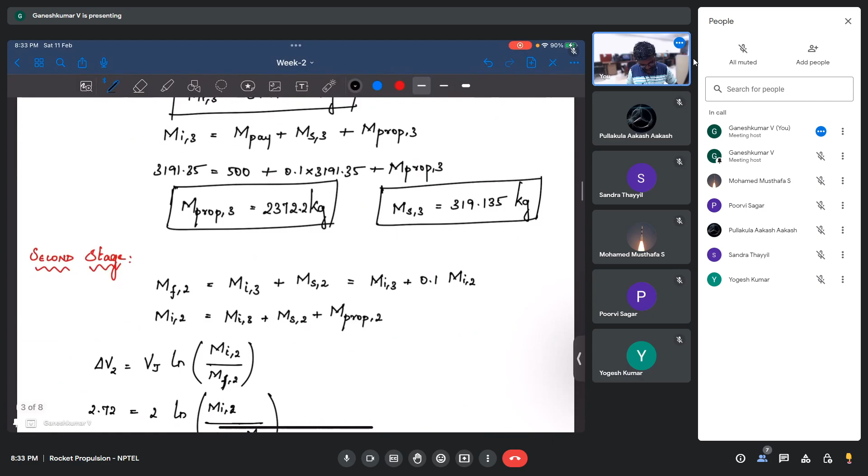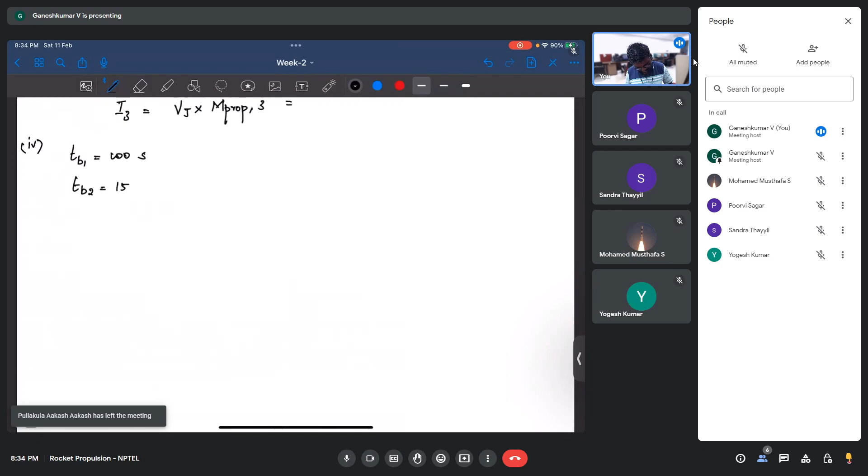This is also done. Now what we have is, if the burning time is given, how do you calculate thrust? Burning time given is 100, 150, and 200 seconds. TB2 is 150 and TB3 is 200 seconds. So burning time for that stage, within that 100 seconds, all the propellant will be burned.

So how do we calculate thrust? We already know impulse is going to be force into time, right? So for TB1, I1 is going to be F1 into TB1, so F1 is going to be I1 by TB1, right? Similarly F2 is going to be I2 by TB2, and F3 is going to be I3 by TB3.

So using this, you can find the force also, how much amount of thrust you are getting from each and every stage. So this is simple calculation, I hope you can easily do it. This is also done.

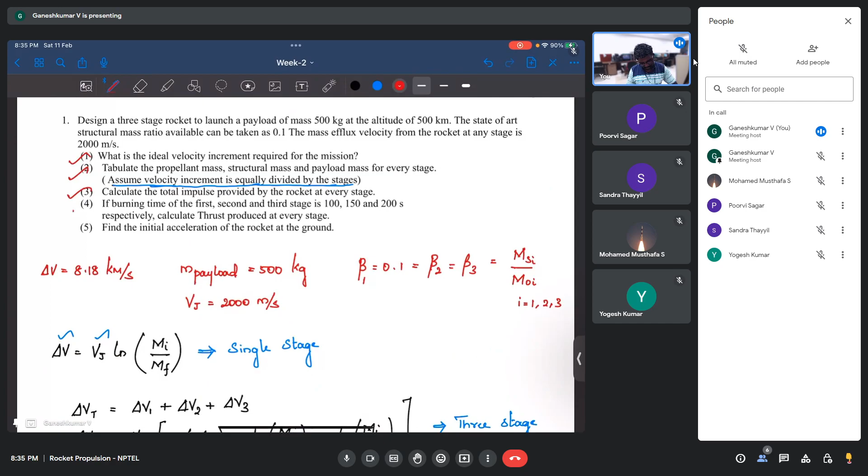Find the initial acceleration of the rocket at the ground. So let me come back with this. Find the initial acceleration of rocket from the... so how do you approach this one? Initial acceleration.

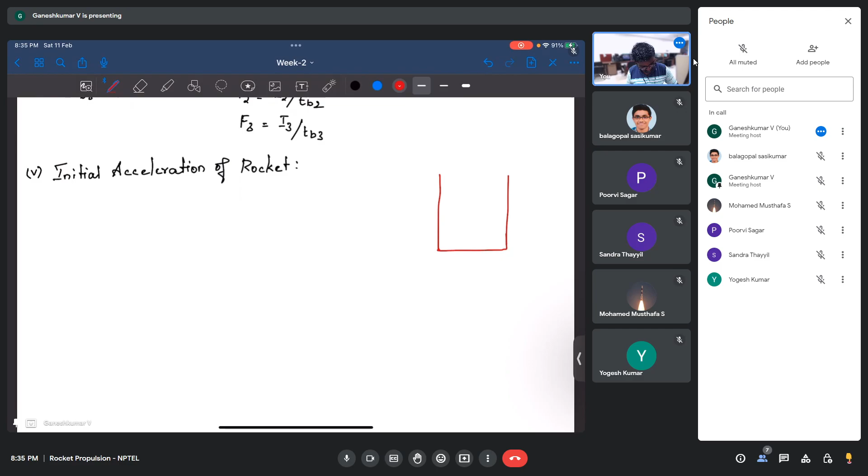What we do is, as one of the students asked: this is our rocket, with some initial mass, and it's going to be attracted by gravity. We're also going to have some thrust. These are the two forces acting on the rocket, and first we'll neglect drag, since initially there isn't going to be any drag, so you can neglect that.

Just apply Newton's second law. Summation of force is going to be mass of the rocket into acceleration, and F, the summation of forces, is going to be thrust minus mass of the rocket into gravity, equals m into a. So the acceleration is F minus mg, all divided by m.

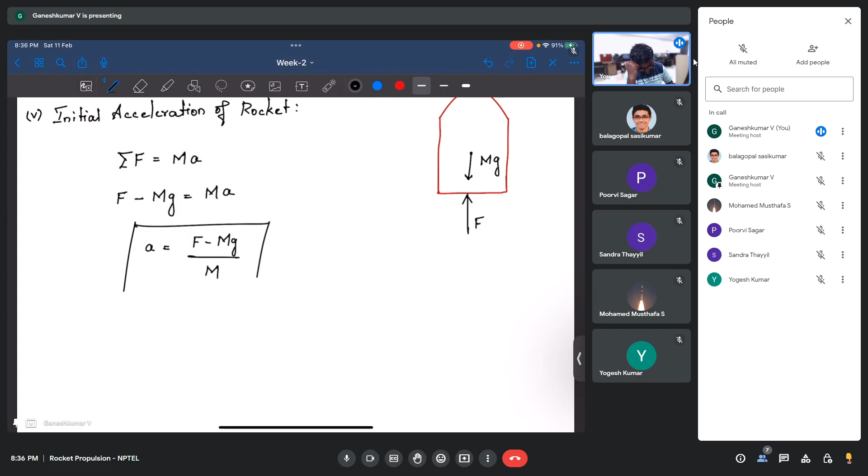Right, there's a lot of things in this. This is what we need to use to find the acceleration. But how do we find all these things? We know gravity at the ground is 9.81 meters per second squared.

What should the mass be? Mass of the rocket, initially—what would it be? We already calculated that, right? So it's 130 tons, which is 130 into 10 power 3 kilograms.

Now we need to find F, the total thrust at the first stage. We found it here itself, but let's find it using mass flow rate instead. What we know is F is m dot times Vj—thrust is nothing but m dot times Vj. You guys know how we get this relation, right? So let's use this approach: m dot times Vj.

This m dot is nothing but the mass flow rate of gases out of the stage—gases going out of the rocket.

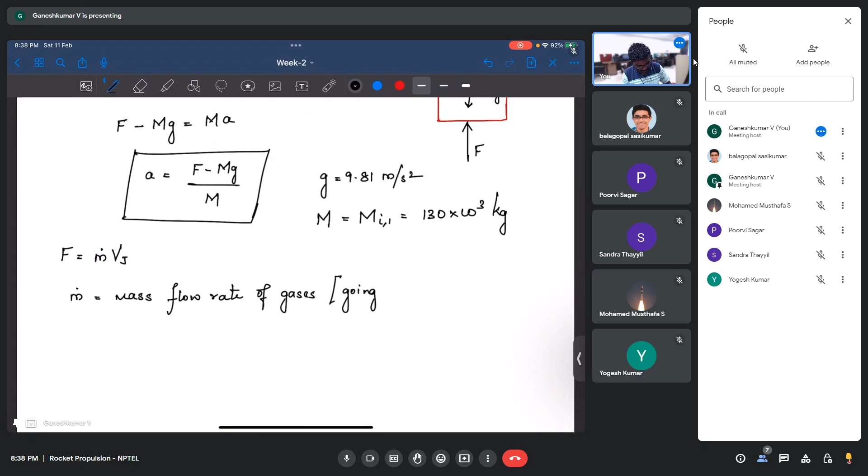What we know is the burning time. Burning time at the first stage is 100 seconds, right? And we also know the mass of propellant at the first stage. The propellant mass present at the first stage is going to be completely burned in 100 seconds, so it's easy to find m dot. What is the mass of propellant at the first stage? It's 96.44 kgs.

Very good. Now m dot is nothing but the mass flow rate of gases coming outside. What are these gases? When the propellant burns, it converts into gases which come out, but mass remains the same upon combustion. So I'm going to burn the mass of propellant at the first stage in 100 seconds. My mass flow rate, assuming it's constant, is just mass of propellant divided by burning time—96.44 divided by 100 seconds.

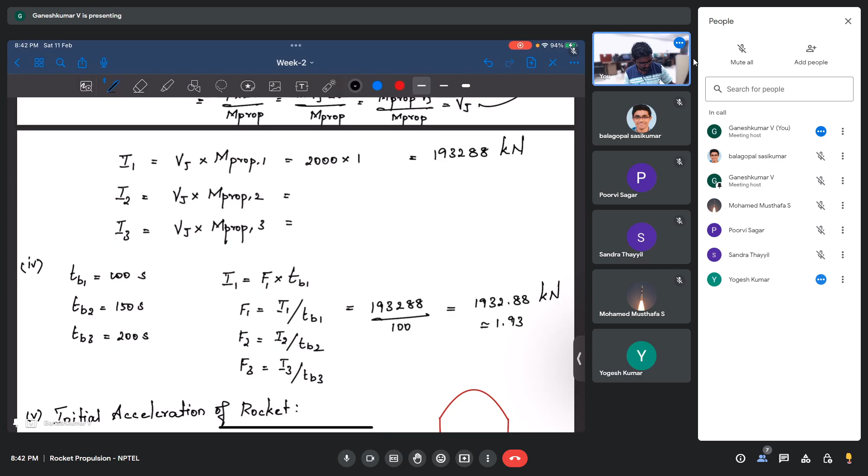1932.88 kilonewtons, which is equal to 1.93. You see, this and this are the same, okay? Because it's actually coming from the same formula. You just calculated impulse and then found the force. What we did was we calculated from the mass flow rate and then found the thrust. So both are actually the same equations, just written in different forms, and it should give you the same solution.

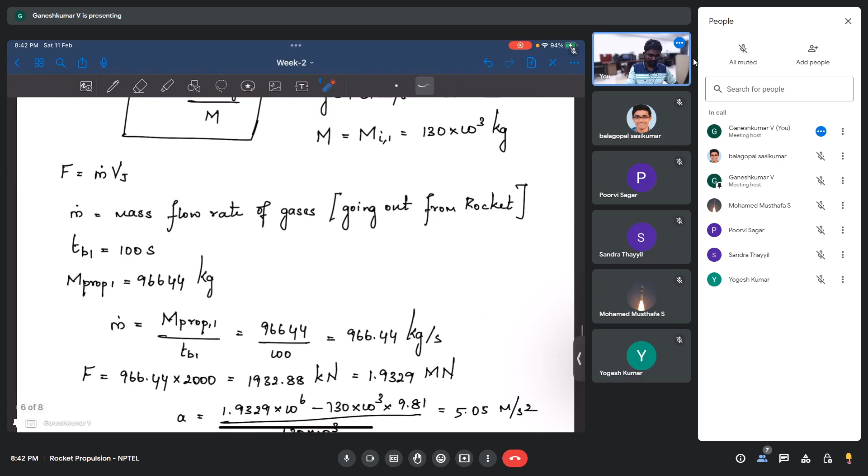So is that fine? How do you find the mass flow rate of gases? I think someone asked - Yogesh, is that Yogesh who asked? It's fine, sir, no worries. So you understood, right, how this happens? Yes, sir.

Sir, what if they ask a question like what is the thrust produced by a rocket? Do we want to add the thrust produced by each stage? Answer it, what do you think? I think I will add the thrust provided by each stage. I will add everything and then put that.

Yeah, so ultimately, at the end, your thrust is going to be dictated by each and every stage. So at the first stage, I'm going to produce some 1.93 meganewtons. At the second stage, maybe 0.2 meganewtons. And at the third stage, some 20 meganewtons. But the total thrust is just the addition of all these things. Only thing is, we divide it into different stages and allow it to burn at different rates, so we get different thrust at different intervals of time. That's all. But the total thrust required to put it at 100 kilometer altitude is going to be the addition of all three stages' thrust. True.

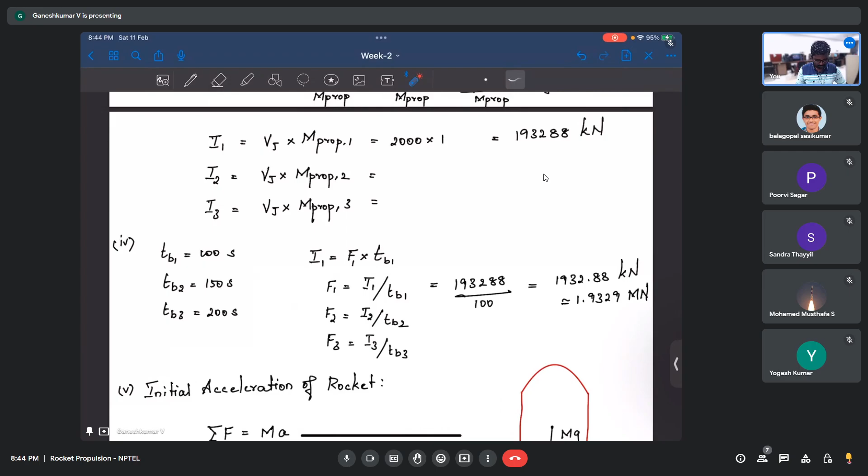Do you have any more questions? Let me check the question first. Okay, so we finally found the initial acceleration too.

And one more question you might also end up getting in your assignments, so week 3, right? You might end up getting what would be the acceleration at the end of the third stage, right? Yes sir, all those things. Sir, in the assignment I have one doubt - like in the second question, they're asking about the kinetic energy of projectiles.

Can we go over which one? Assignment 3, yes sir, as in week 3 assignment, second question - question number 14, like the second topic, question number 14, kinetic.

And do we have any examples like this for that? Okay, what has been asked is that there is a satellite of mass 400 kg in orbit at 8 kilometers per second. It shoots a projectile of mass 40 kg with a velocity of 2 kilometers per second along the direction of its motion in the orbit.

Determine the following and suitably fill in the blanks for question number 16. So there is this 400 kg mass, orbital velocity 8 kilometers per second, and 2 kilometers per second. Initial momentum of the satellite before firing the object, final velocity of the satellite when the projectile leaves, velocity of the projectile as it leaves the satellite in the inertial frame, kinetic energy of the particle perceived by the observer in the inertial frame of reference. Okay, this is interesting.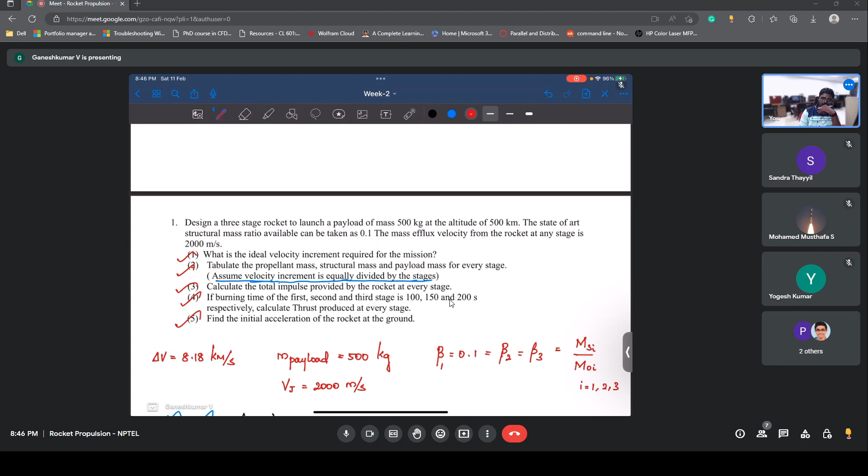So actually I didn't frame anything, it's just - I'm also new to this question. So there is this satellite which is in orbit, okay. And what we know is it is moving at a velocity of some 8 kilometers per second, and it has a mass of 400 kg. Wait, is it mass of - it's 400 kg, right, it has 400 kg. When it is going, it is going to shoot up some 40 kg mass.

They're asking a series of questions: kinetic energy of the particle in kilojoules as perceived by an observer in the inertial frame of reference. So you need to think, when you talk about kinetic energy, what is kinetic energy? It's half mv squared, right? And they are asking for a projectile, right?

This thing is 40 kg, released at 2 kilometer per second. The catch here is, what is the mass here? Is it 40 kg or 400 kg?

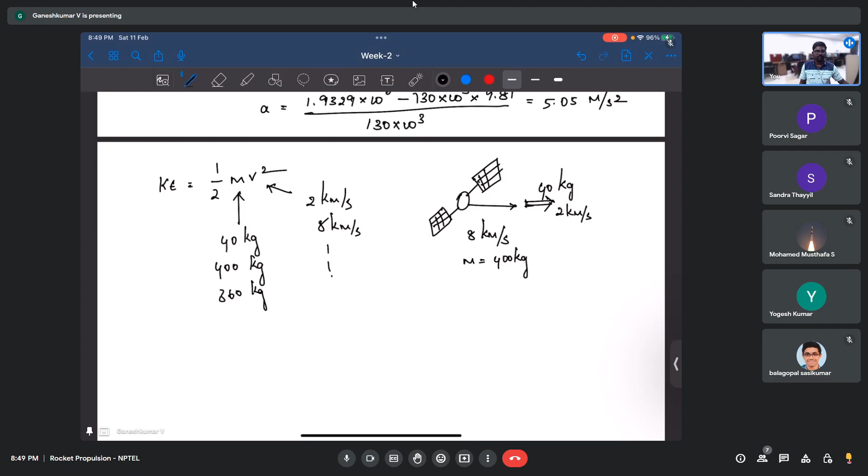It's either moving at constant velocity or it is stationary or moving with constant velocity. I am the viewer, I am in a stationary position. So it is asked for inertial frame of reference in kilojoules.

Okay, try doing it, let's see. By an observer in inertial frame of reference. So observer is not in satellite, right? Mostly you won't be in satellite. We take the Earth stations as observer.

We have Earth stations to have connection with satellites. So inertial frame is just something that is stationary. Think of it like that, and then you try to express the velocities in inertial frame for both mass and satellite, and then for whichever kinetic energy they are asking, you just put half mv square. Most probably, yeah. Give it a thought, let's see, we'll discuss in next class.

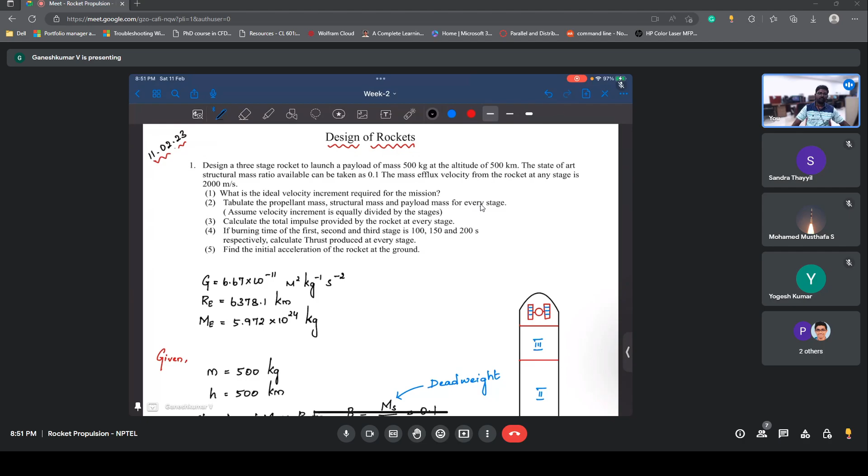Other questions, I think all others you should be able to answer. I tried to cover everything in this one question here. Only thing is, here they gave all the stages, propellant, structural, and jet velocities also, everything separately. What we did was we took some mass ratio, and they were asking ratios. In the assignments, what we did was opposite - we took a ratio and payload, and based on that, tried to find out the propellant mass, structural mass. That's all. Other than that, every equation and applicability of equations will be the same, and I hope it will be easy for you to answer this assignment.

There are a few questions like catapult launcher also. I am not going to discuss this, we will discuss in the next class. It is for you to think and provide the answer. It's interesting - if you don't go with the rocket, there are few catapult launches also. You can search for it in Google. Instead of using a rocket to launch a spacecraft, you can launch from the ground, you can just throw it away. And if you're trying to throw it away, what are the changes it's going to have is what they have been asking. I will leave it to you to think and answer. We will discuss in the next lecture, next session.

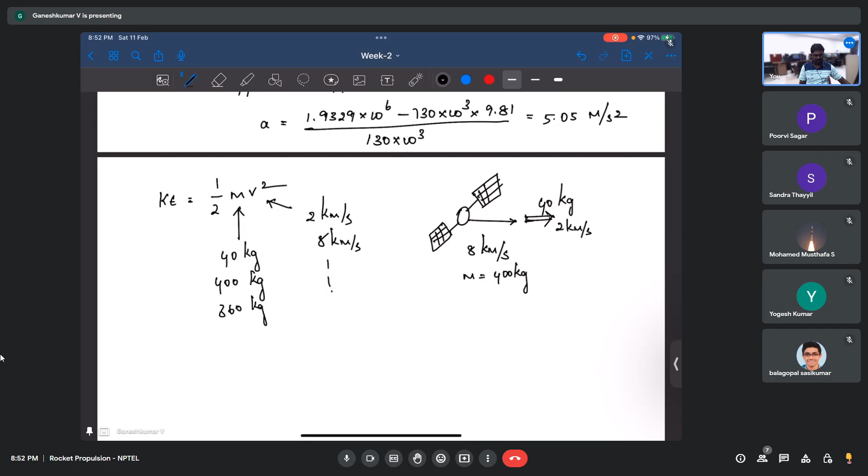So other than that, do you have any more questions in either this week's assignment or today's question, or previous week's assignment, or even lecture videos?

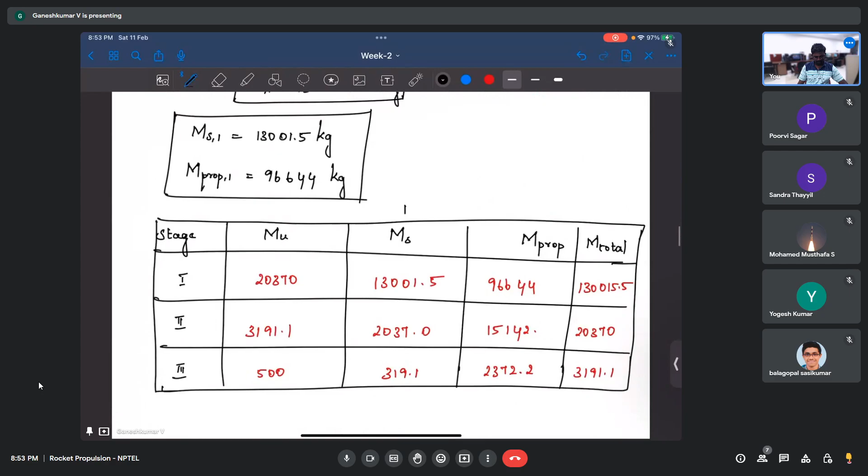Suggestion for you guys is to go and look at this SSLV, look at its specifications and try to find what would be the thrust given by each stage, and what would be - so they would have told that the total mass is going to be 120 tons, but they wouldn't have told what is the mass of each and every stage, right? So you can try to understand those things by doing these few calculations.

You can also look at this propellant they are using - they are going to use the same propellant for three stages, and for that propellant the velocity is almost the same, only around 2500 meter per second. It has a specific impulse of 260 seconds, the HTPB propellant. So the jet velocity will be around 2500 meters per second, and using these and maybe beta also, you can find what beta they would be having, what is the state of art they are having at ISRO. So all these things you can find.

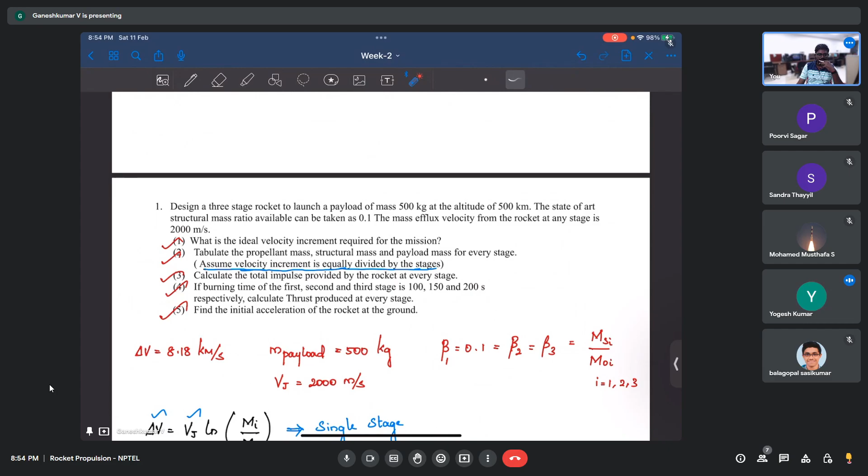So I have one doubt in last lecture, that is lecture 9. In the last few seconds, he has derived the formula of effective exhaust velocity right, sir?

Which is equal to Vj equal to square root of 2 gamma... Yes sir, in that what does gamma signify? Because he only said gamma, gamma, but never explained what gamma is. So you're referring to this one, Vj is square root of 2 gamma.

Tc by molecular weight, I guess. No sir, he did it like 2 gamma R naught Tc, universal gas constant, R naught Tc by gamma minus 1 into molecular mass, times P by Pc into gamma minus 1 by gamma. So actually this gamma is nothing but Cp by Cv, which you know, right?

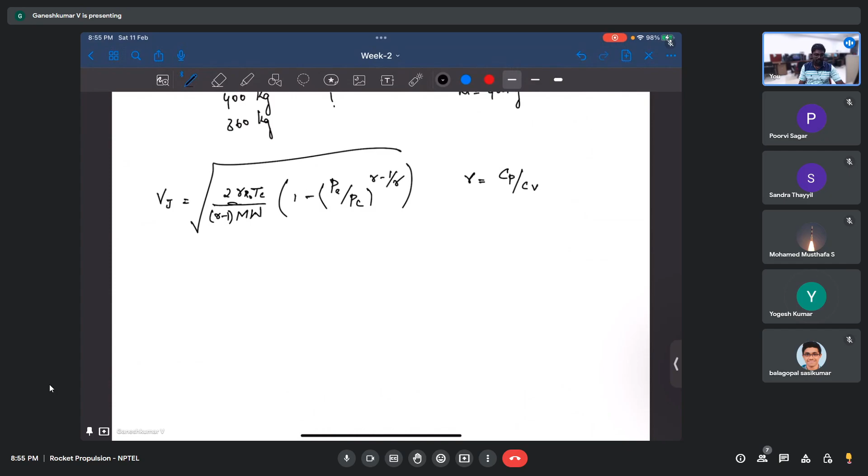So the one important thing to note in this equation is that when you increase Tc, you are going to have Vj to be more. When you decrease the molecular weight, again you are going to have Vj to be more, and when P by Pc is going to be less, again Vj to be more. These three things you understood, right?

Yes sir. So now, what is the effect of gamma? In this equation, we addressed molecular weight, we addressed P by Pc ratio, and we addressed Tc. R naught is of course a universal constant, but there is this gamma also. So what is the effect of gamma? I hope that is what has been addressed in the lecture.

So usually, gamma is equal to 1.6 for monoatomic gas, 1.4 for diatomic gas or others, and gamma 1.3 or 1.1 around that for polyatomic gas. So if you see, gamma is not varying that much, it is not varying with orders of magnitude, just 1.1 to 1.6.

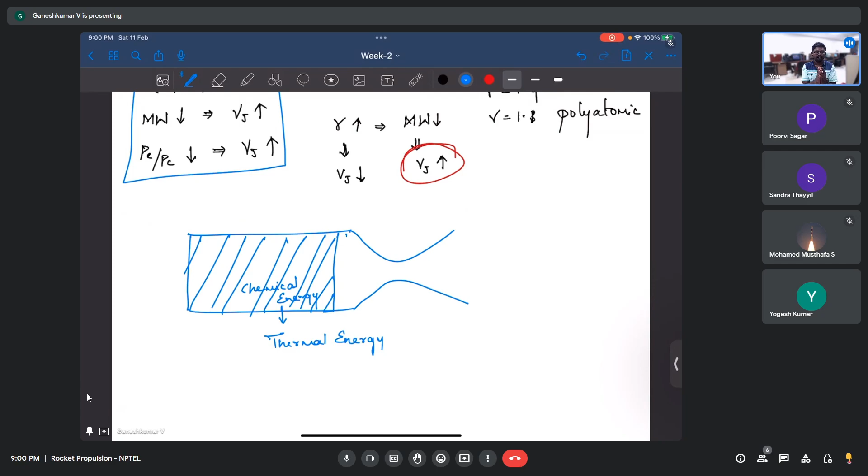Okay, so upon combustion, what happens? The gas temperature rises, right? If the propellant has a high chemical energy, let's take a fuel, petrol or diesel. Upon combustion it creates very high energy. In your CI engines or SI engines, in addition to high energy, it's going to produce high pressure also, which pushes the piston down. That is what's happening here.

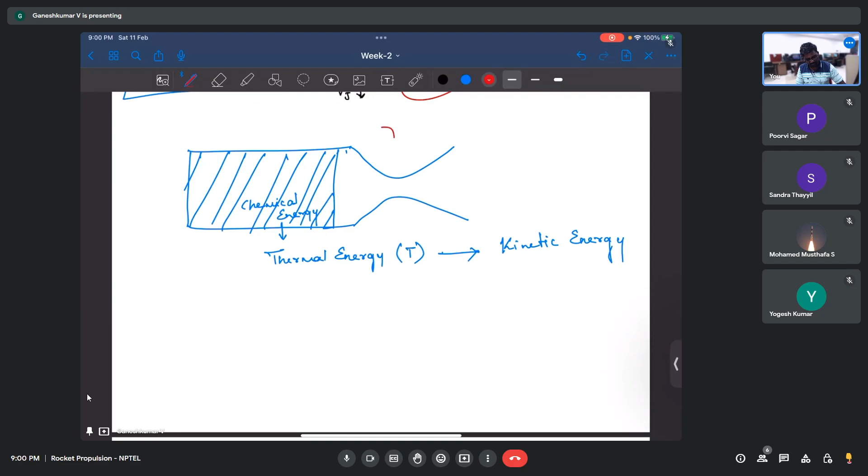There is no such piston arrangement. What happens is it just rises the temperature to very high. So what you are having is very high temperature, and this high temperature gets converted into kinetic energy. Where it gets converted is this nozzle. This nozzle converts thermal energy into kinetic energy, which gives very high velocity.

So for a nozzle, at the inlet, if I have more thermal energy, I'm going to have more kinetic energy at the exit. So if I need more thermal energy, my temperature inside this combustion chamber should be high. If I have more thermal energy, I am going to have more velocity at the exit. That is based on logical conclusions. You can come up with this. Is that clear? Based on simply logic, you can apply logic.

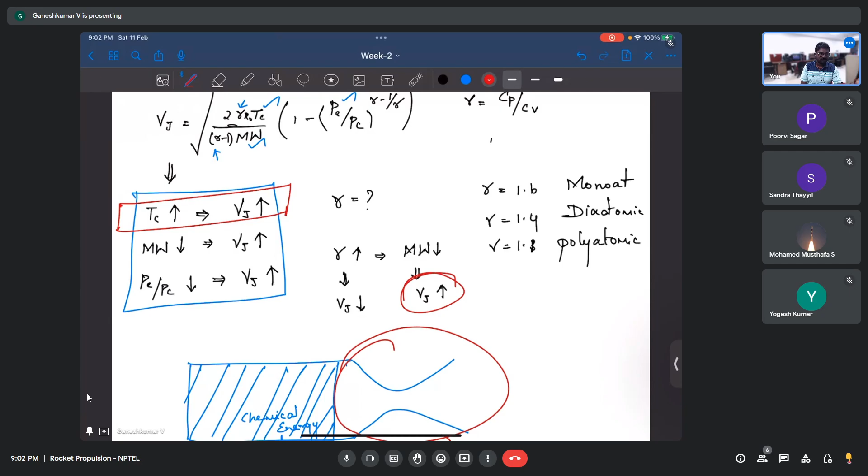If you rigorously derive this, you will know the sort of dependence. Vj is proportional to square root of Tc. We don't know that using logic, but based on this energy conversion process, we can say if I have high thermal energy at the inlet of the nozzle, I'm going to have high kinetic energy at the exit of the nozzle, which you will see in subsequent lectures or assignments. When you increase the gas temperature, you're going to have high velocity.

And the second one is molecular weight. What role does this molecular weight play? So the nozzle is nothing but an accelerator. You see the nozzle as an accelerator. It accelerates the gases to very high velocity. Initially it comes at very low velocity, and in the nozzle it gets accelerated to a very high velocity, supersonic velocities.

If you have a very high molecular weight, the mass of the gas is very high, and it is not easy for the nozzle to accelerate. It has to give more force in order to accelerate the very heavy propellant or heavy gases. If I have hydrogen gas which is very light, it is easy to accelerate. So when the molecular weight decreases, the acceleration inside a nozzle is going to be easy, because the mass is less, so you can easily accelerate the gases.

Another thing is pressure, which again you will see in the nozzle. At the inlet, if I have high pressure, at the exit I have low pressure. PE is the exit pressure and PC is the inlet pressure for the nozzle, which is the combustion chamber pressure. So if I increase the pressure, from fluid mechanics we know the flow is going to happen. If I have greater pressure gradient, I'm going to have very high flow. If I have less pressure gradient, I'm going to have a very slow flow. That is the logic you will apply.

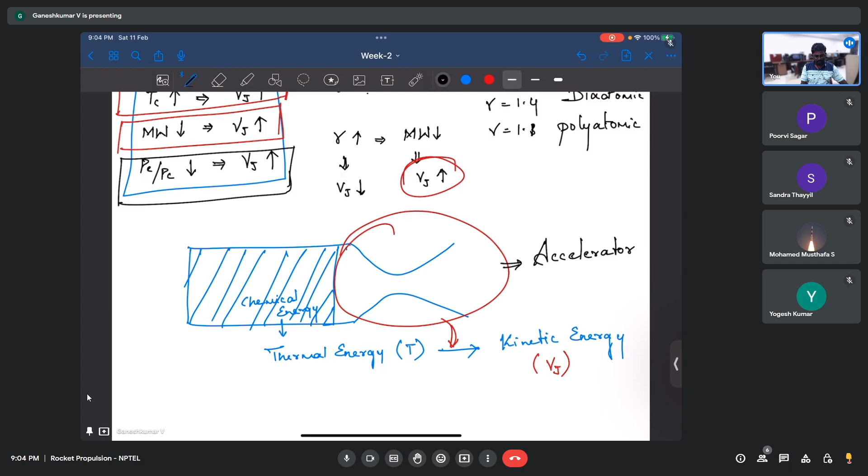So when there is an increase in chamber pressure and exit pressure stays the same, the ratio PC by PE is going to be very large. Chamber pressure is very high compared to PE, then a very high pressure gradient is imposed, which accelerates the flow in the nozzle. That is what's happening, and if you logically think, you will be able to arrive at these results.

In order to get an accurate proportionality between these parameters, you derive using a steady flow energy equation, assuming a lot of assumptions like calorically perfect gas, isentropic process, and adiabatic walls. With all these assumptions, you arrive at that expression, which gives you the more correct dependence. That's all, but logically also you can think about this.